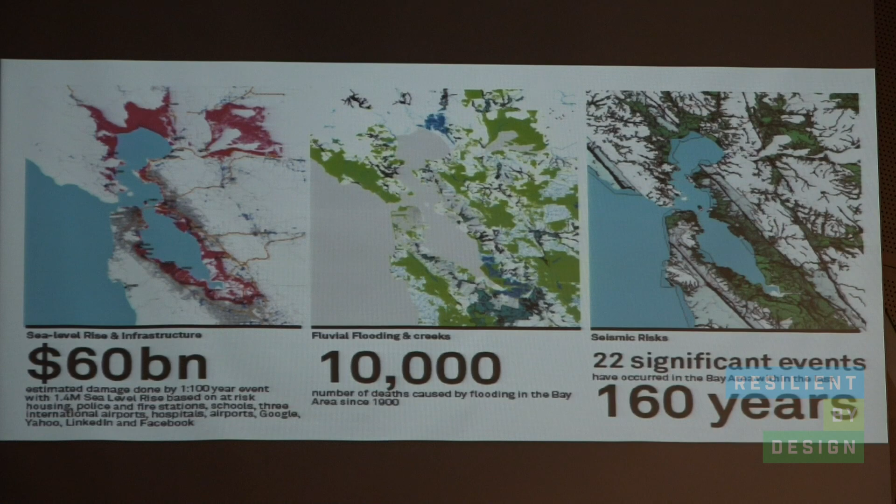And then further to that is seismic risk. There are fault lines on the ridges that are limiting retreat up the hill for those urban settlements, and there's also liquefaction risk on the shoreline.

But is it possible that the real disaster is already underway?

When we tour around the Bay Area, it's clear that a group of cities has grown into this kind of mega region, but it's something of a mega commuter region. What most people talked about as their shared experience is the time they spend in their cars on the motorways looking at the Bay, which is really sad for us from cultures that really value waterfront places, and that's something we wanted to bring to this process.

But also equity — there hasn't been an equitable sharing of that prosperity as the region's grown, and furthermore there's some limitations on the centres of community that used to be places for people to gather; they've actually kind of weakened over the years. So the street retail, the libraries, the town centres, they've kind of faded, and that's definitely a problem. Who's greatest impacted by these challenges?

Well, we went to a number of vulnerable communities on the shoreline. They're traditionally located on the shoreline because of that engagement with previous industry that's now gone. They don't have access to open space and recreation, and they don't have access to the sorts of community facilities they need to build social resilience.

There's also the ambitious Baylands projects and the Bay Trail, which are fantastic, but they're at risk from sea level rise, and also there's something missing in that equation that kind of links those communities to that space on the shoreline.

So is there a better model? It's definitely something that we've talked about a lot in this process. There's 101 cities, 9 counties. Is there a way we can turn something that we talk about as a weakness for this region into a strength? Can we use that kind of granular infrastructure of schools and libraries? Can we build on the number of communities, making a network perhaps, rather than complaining about how hard it is to organise everybody through one regional governance model?

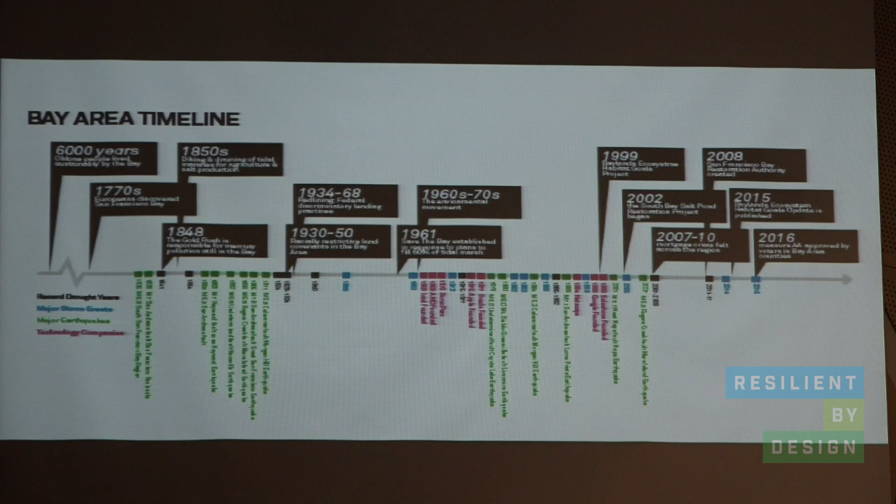So we look across the timeline of the Bay, and there's certainly been a fair few disasters in the past. And what's been the biggest asset within those disasters? Have our needs really changed that much since 1906 and just last month?

We were really interested to see how communities use spaces and systems every day, but also in disaster. Those systems are sometimes large, but they're sometimes small — sometimes movement systems, sometimes information systems, or just sustenance systems.

So when we start developing a concept for the Bay as a region, we start by looking at the existing pattern of development. The Bay Trail, the Ridge Trail, the transit, freeways and priority development zones are all in loops, and they're vulnerable — like a circuit — to being broken, as we've heard over and over again.

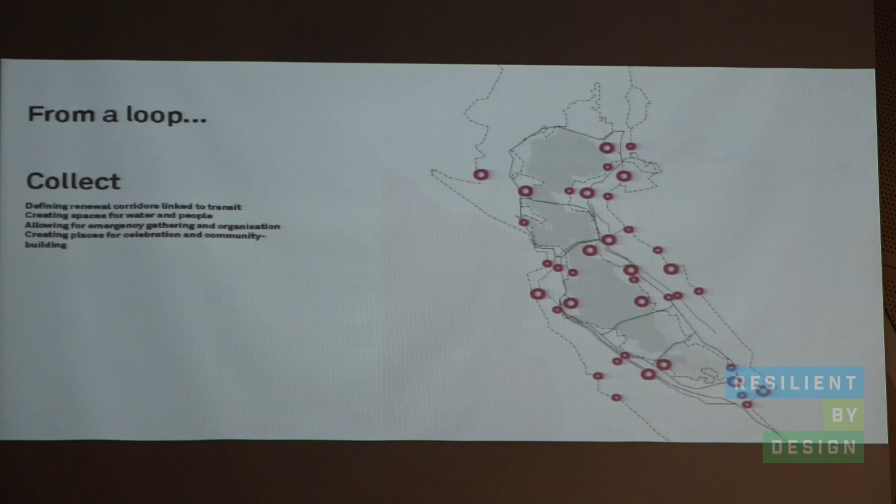So what we'd like to do is form points of collection on the waterfront for people to come together, up in the towns and at transit nodes, and up at the ridgeline. Through these points of collection, we collect water, collect people, and make them points for disaster response.

So we want to join them with corridors, connectors as we call them, giving people access to the Bay, engaging them in the conversation about how we respond to these resilience challenges, and then connecting them across to each other — transitioning from what we call a loop into a network.

And we think this is key to resilience. It's key to managing existing water challenges. It's key to managing existing community capacity for resilience. But most of all, it's building a system that is less vulnerable than the current system, which we've seen so often can fail.

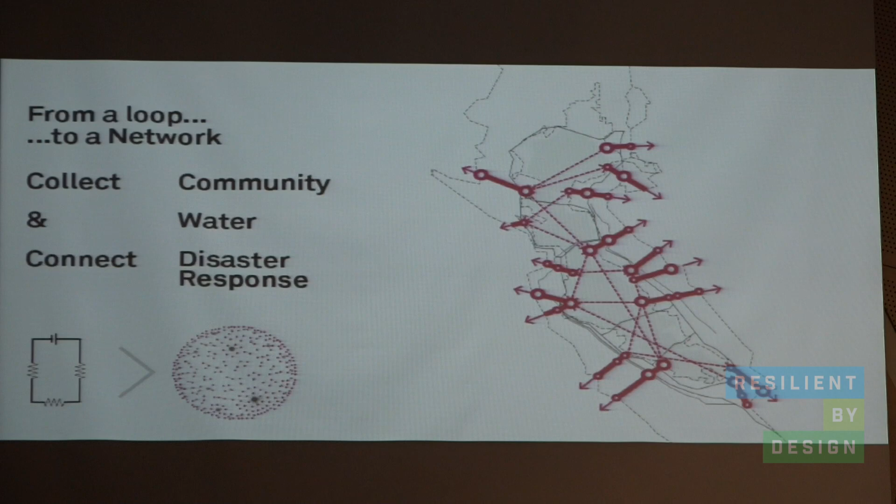So we talk about this collect and connect system — community using it, the advantages for water management, and disaster response systems. So we're looking at two scales here: a regional platform that can create that network, but also this prototype project.

And if we dive into the existing condition, these are the types of sites that we're talking about — communities of concern that are on the shoreline, but they're sharing it with infrastructure and industry, and they're very tightly packed in.

They're suffering from fluvial flooding along creek lines, but that's often made worse by restoration projects that are bringing rising tides closer to those communities. And they're also often just downhill from transit nodes and town centres that were at one time real centres of community, and just need a little bit of help to get back to those valuable systems that they could be.

So what we're interested in creating is space - making room for water, making room for communities, and making room for disaster response. We're talking about making a series of spaces up the hill in the town and down on the water's edge, connecting them to creek corridors so that they carry water capacity, retention, treatment and reuse.

Part of our approach is actually building a digital platform. We need the communities, because we believe that communities themselves can help to provide programming for these collector spaces. This is just an example. We believe that the intelligence of the community can produce the programs that we want to gather in our connectors and collector spaces.

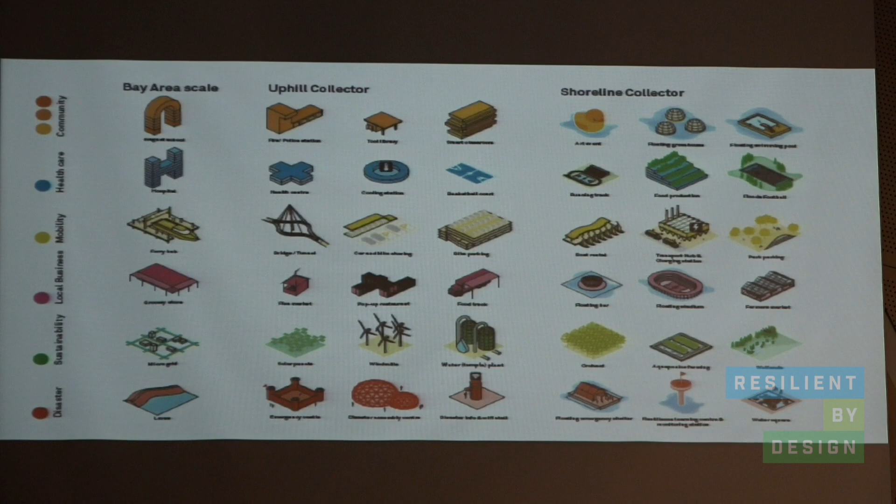It's about the communities, but it's also about infrastructure, disaster solutions, education - different levels of connection. With our platform, we will collect these ideas and programs, and then we can turn the collector areas really into urban labs. So the communities we're looking for can be the first ones and provide examples and set the tone in the development.

So we've been talking about making these collectors, and we always have an uphill and waterside version. The most important role of the collectors is making spaces where communities can meet - places where we can add programs for education, where we can upgrade transport by making better links to bikes, to bus systems, where local businesses can set up, where we can make learning centers as well.

During some parts of the year, the collectors really are collecting the water, like they might have been doing on days like today when we have a storm. There will be retention areas, both above and underground, but around the collectors there will still be places to do something with water reuse. The ferry will still be accessible even in the flooded areas.

There will be floating structures, and places where you can find excitement and healthy things like markets and playgrounds. The collectors are also an important space because the community will realize that by using the connectors, they can go uphill or downhill to spaces where solutions are in times of disaster - maybe shelters, information, an escape way when you can go down to the ferry.

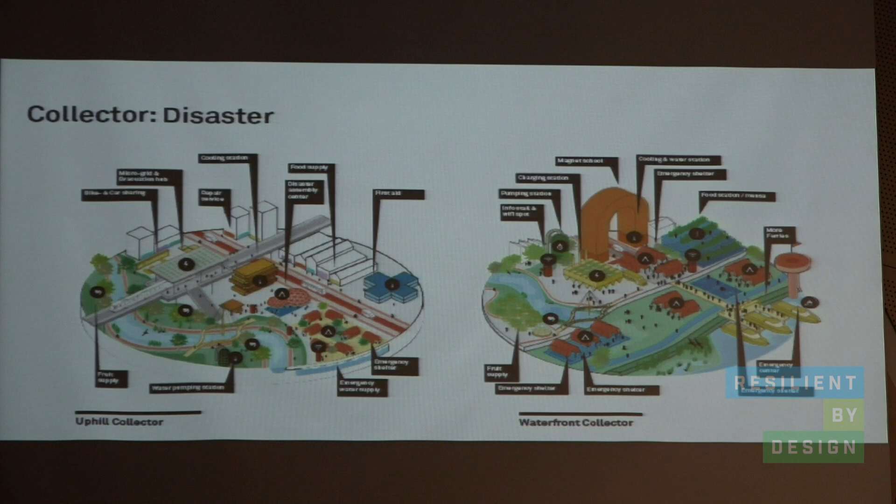Because our connections are across the Bay systems, which are always circular, when parts of the infrastructural systems break down, we actually provide ways for people to go up or downhill whenever needed, and you can also get information there. Ultimately, along the public spaces we can make, along the streets and along the water retention areas, the creeks that are renaturalized, people might also find micro-hubs of information and educational facilities, higher value public spaces, and spaces for community gathering.

And ultimately, our idea is, of course, to bring the community back to the bay.

So I'm going to talk through our 3 opportunity projects. As Natalie was saying, really, this idea, this system, this collection of elements, connections, and collection points, we think could be applied in multiple locations - around 50 or so we've identified, and of course we've focused on 3 in particular.

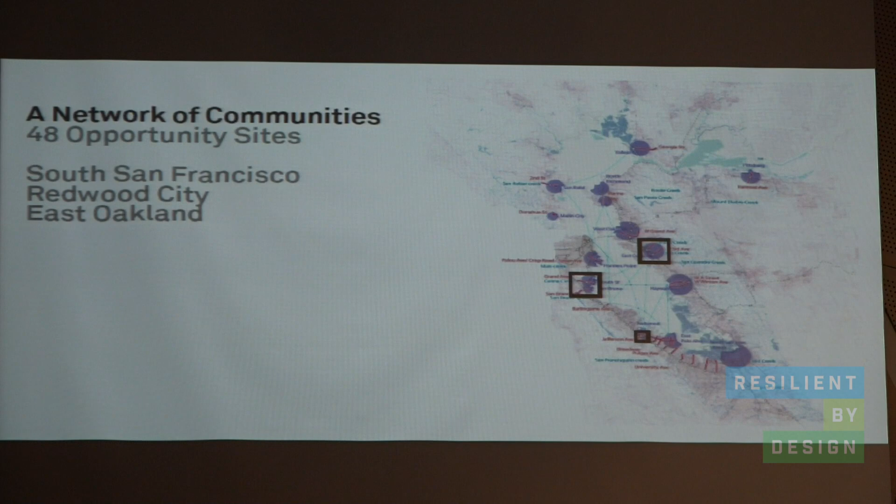So I'm going to run through why we've selected those, and I guess the starting point of our thinking, because it's so critical for us to be thinking about those individual communities and what they would like to see in the future of those places. We're just really making a few suggestions at this point that we would need to work through with those communities.

The 3 opportunity places that we've looked at are South San Francisco, Redwood City, and East Oakland. What these 3 places have in common are some of the challenges that we think are particularly important or urgent: flooding risk of the foreshore, communities of concern, and often those 2 things overlap. Infrastructure, such as motorways and rail, that block access to the bay, and in turn block the opportunity to open up the bay edge for public use.

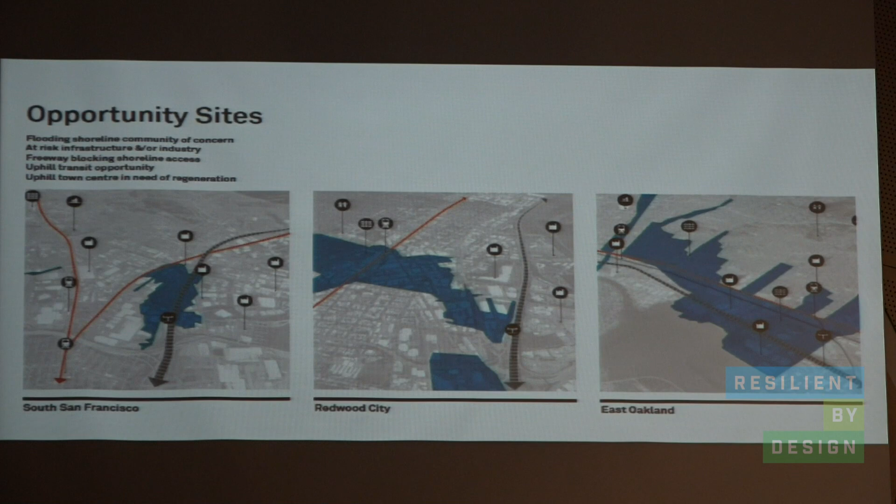Uphill transit opportunities, as well as uphill town centres and main streets, which effectively have been through a period of decline. So firstly, looking at South San Francisco, self-proclaimed as the Bay's industrial city.

The main street of Grand Avenue runs east-west through this place, westwards into the hillsides, which were once spotted with cemeteries, eastwards to the industrial waterfront, a place which has been undergoing quite interesting change, particularly more recently.

This area has major flood issues. It has a downtown and an identifiable main street, which has gone through some decline over decades, but is undergoing a revitalization program currently. But one of the key issues here is that connection to the waterfront from the main street, particularly with the impact of a few pieces of infrastructure coinciding, rail and motorway in particular.

Within our thinking, we see a future where that main street and other street connections are revitalized and reconnected to the waterfront. We've expanded space along creek lines, for ecological as well as social program. Thinking about what that program could be, we're thinking about the industrial spaces, how they could be retrofitted or augmented with community program, with more ecological ideas for water treatment and water collection.

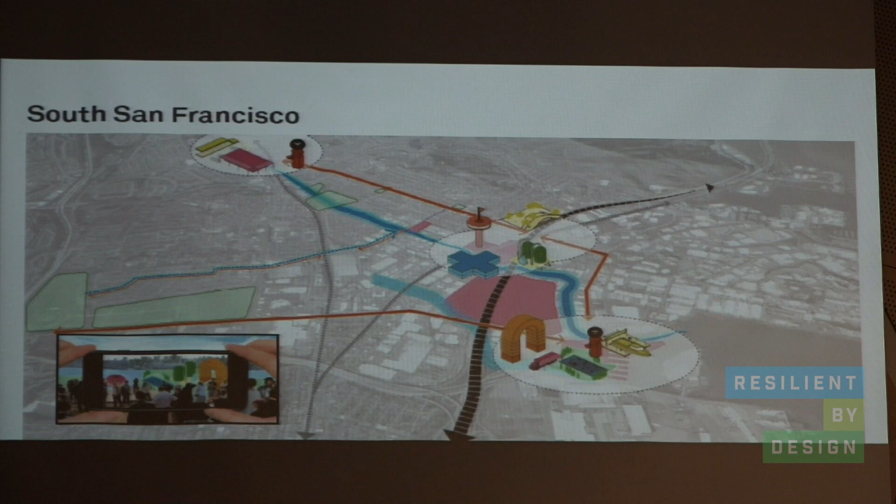A resilience learning centre, a focus around education spaces, whether that's formal schools or informal learning spaces. And then thinking about the future of Grand Avenue, the potential for local enterprise, local artists to start filling empty shop fronts, to start occupying blank facades, to embed digital as well as ecological infrastructure within the streetscape itself, and potentially to bring transit back to that important local connector for that community.

And then looking at Colma Creek, where it hits the foreshore, creating a large open space which can be flooded regularly if that's what happens, but then also creating new pedestrian and cycle connectivity, new spaces for learning, whether it's a magnet school or informal outdoor classrooms really based on the ecology and the water functioning of that place.

Secondly, Redwood City, claimed to be the oldest city on the peninsula, established, as you can tell by the name, for the forest industry, at that point between the waterfront and all the trees on the hillside. So a critical point in that kind of transfer of the resources onto the water.

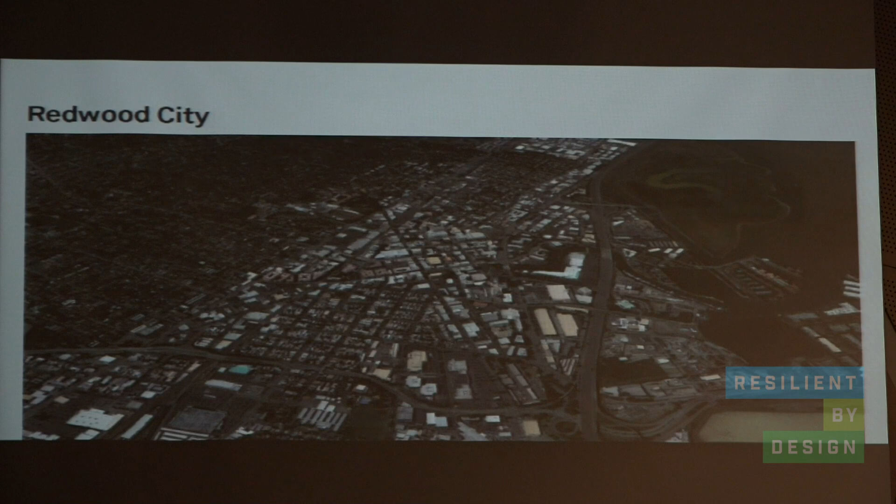Again, a place that's highly vulnerable in terms of flooding, a revitalizing downtown area which is disconnected from waterfront because of infrastructure and industry as well.

We would look to build on historic streets, in particular Broadway, which links to the bay itself, being able to unlock greater public space at the bay edge, but also linking into the hillsides, to deliver people to that natural amenity, but also as disaster response.

What we've indicated here, as well as in the other locations, is the idea of sending and receiving areas. The sending area around the downtown, which could be regenerated in some way, creates finance, which is then invested in the receiving areas, creating new public amenity, new public space and infrastructure.

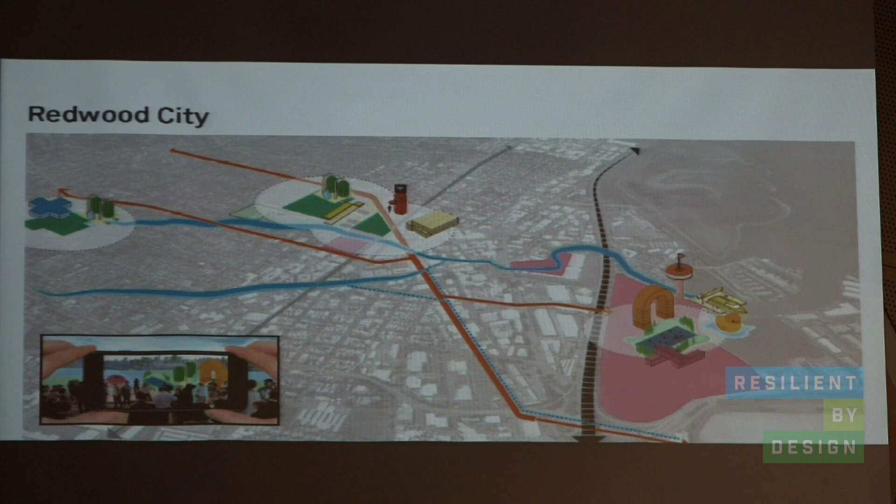In terms of some of the program, again, the idea of water, perhaps in this location because of the interesting water temple idea on the hillside, perhaps there's a modern day interpretation of the water temple, perhaps a collection of cultural and artistic spaces, which is more relevant to this area. But then also the idea of the waterfront being inhabited by family groups and community groups as well.

In the town centre, we're thinking a new station plaza, one that's embedded again with technological and ecological systems, a shoreline park, which extends that water edge connectivity for cyclists and walkers, fields that can flood but can also be used for community sporting events, for picnics, for food-based festivals and other events. Again, bringing people to the waterfront and helping them to engage not only with the water but with each other.

And then thirdly, East Oakland, a place that's undergone huge change, particularly social change over the last century. Once had a system of creek lines that have now been altered, somewhat destroyed by infrastructure and industry as well.

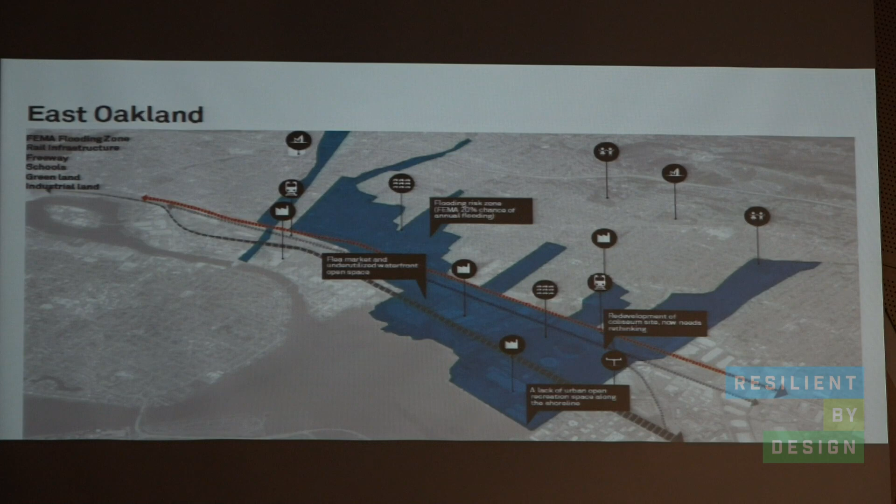Again, similar challenges to the other two locations: significant flooding areas, connectivity problems, a lack of open space along the water edge in particular, but also in the upper areas of the hillsides. So we see an opportunity for a number of urban connectors from the communities to the waterfront, the opportunity to open up significant areas of open space around that waterfront and to continue some of the connectivity systems occurring on the eastern side of the bay, such as the Bay Trail.

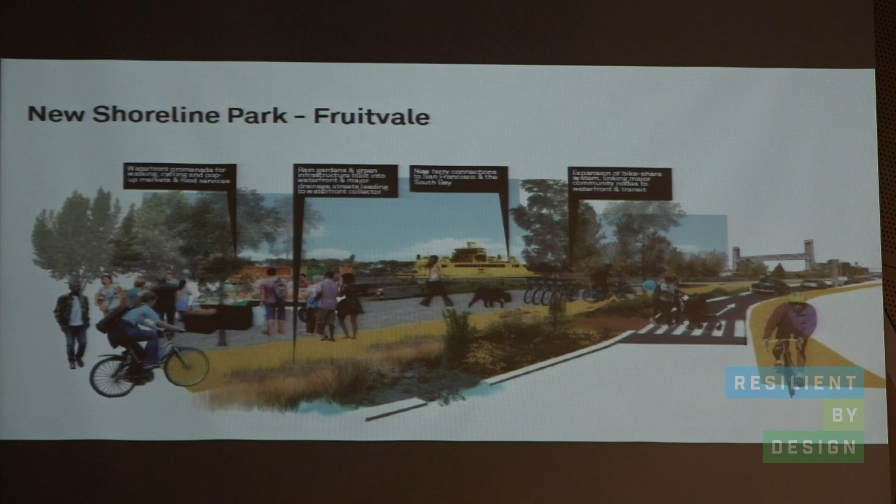The programs here are very much focused on community need and to be co-designed with the community themselves. We think there are great opportunities around food production as well as distribution, possibly harking back to the cultural history of this place as the fruit orchards and fields of the area. So spaces along the waterfront where community engagement and greater connectivity for cycling, walking, potentially a new ferry connection linking to the rest of the bay, but then along creek lines as well, with food-based, community-based activities and events which could occur.

So we thought we would wrap up by talking about this idea that these places can start small. They can be informal, community-led, community-focused. We're really interested in creating proactive and optimistic engagement with people to start with temporary, small scale, and then build to the larger regional scale, thinking about many of these projects as experimental, innovative, new models of not only creating things, but working with people and different organizations. And looking not only to communities and government, but to a whole range of other stakeholders and participants in the process, particularly thinking about where funding sources may be through FEMA, through Caltrans, through water infrastructure and disaster relief funding, which could be unlocked and redirected towards more of a community outcome.

So ultimately building that idea of this network of communities that are brought together by this idea of connecting and collecting people. Thank you.

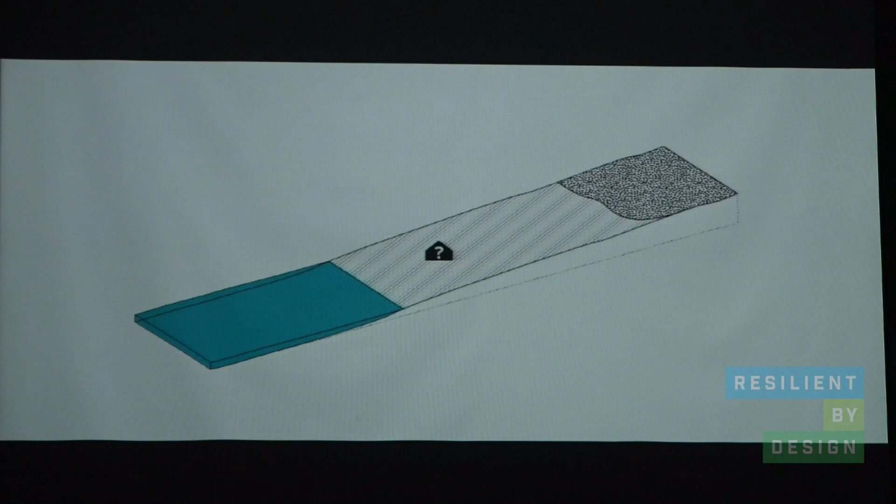The Bay Area is in crisis. When large groups of our neighbors can't afford to live in their homes, then the model for living in the Bay is broken for all of us. Many of our most vulnerable communities, those enduring poverty and structural racism, also live in areas highly susceptible to sea level rise and flooding. We need solutions that allow neighborhoods to remain in place and thrive. We must produce more housing, preserve low-income housing, and protect residents from displacement, while improving the quality of neighborhoods for everyone.

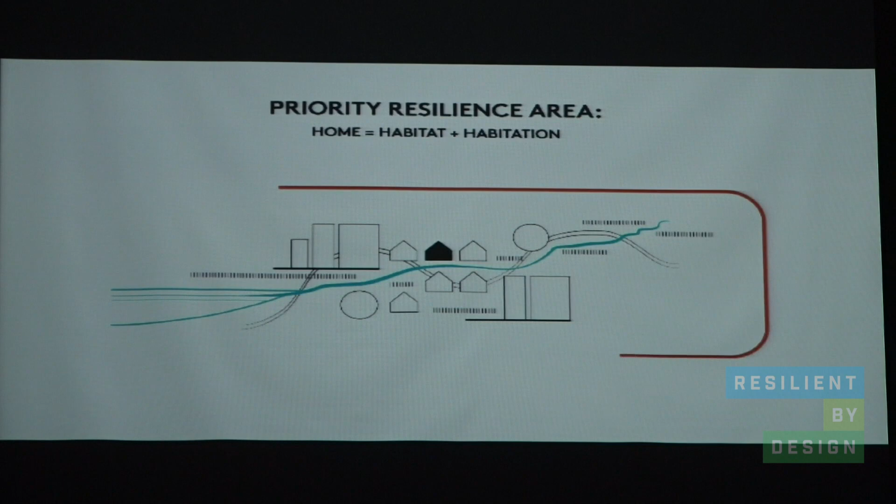The Home Team proposes the creation of priority resilience areas where new ideas of home emerge from a healthy and dynamic Bay ecosystem. New regional patterns along the Bay Edge intertwine the health of the Bay and the health of our neighbors. Working in partnership with community members, we will use design as research to take on challenges and create opportunities for communities to relate, adapt, and thrive.

North Richmond is a place of historic racial inequity. African Americans who arrived in the Bay for the World War II shipbuilding effort were forced to settle in the low-lying area, cut off from other communities by railroads and infrastructure. The community organized, developing a North Richmond vision plan, programs at the Verde School, and greening projects with Urban Tilth.

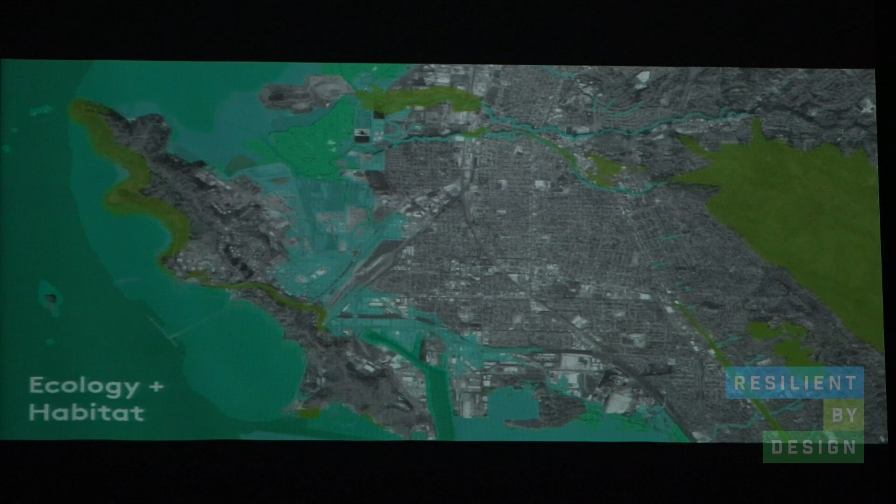Green infrastructure and floating trails can address flooding while enhancing quality of life. By improving walkability and bikeability to BART and the ferry terminal, residents can reduce commute times to re-engage with Bay nature at Point Molate as part of a daily routine. Horizontal levees and improvements to wastewater infrastructure open up opportunities to build new, permanently affordable housing.

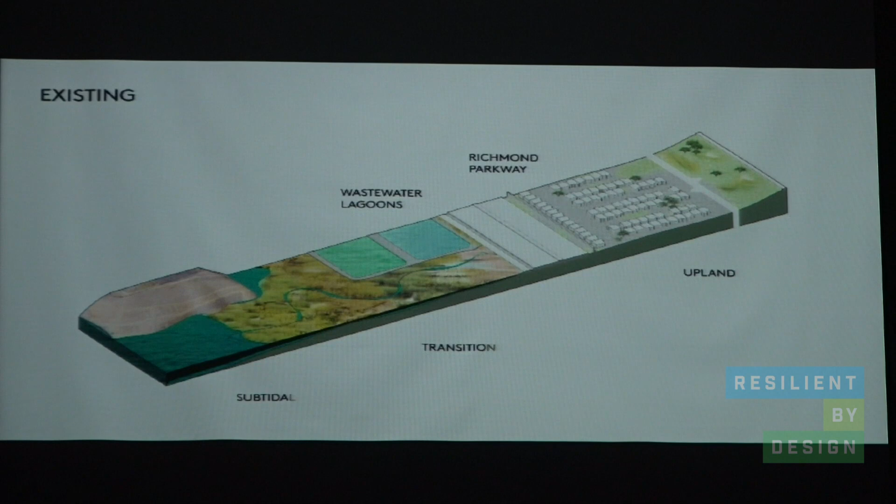The community and ecosystem will thrive, catalyzed by an urban ecology business incubator that is a source of jobs, innovative housing, and a clean energy park on the site of the former landfill. In the near term, the North Richmond Water Reclamation Plant can provide treatment with constructed wetlands, allowing for pocket marsh connections that are healthier for the Bay Edge. As waters rise, the constructed wetlands transition to salt marshes to augment the Bay's estuarine habitat.

Looking 20 years out, decentralized wastewater systems can be located in each neighborhood. These wastewater systems look like greenhouses open to the public. They can also process increased nutrients and return clean water to the Bay. As infrastructure is relocated to inland conditions, the waterfront is freed up for new floating housing and ecological restoration.

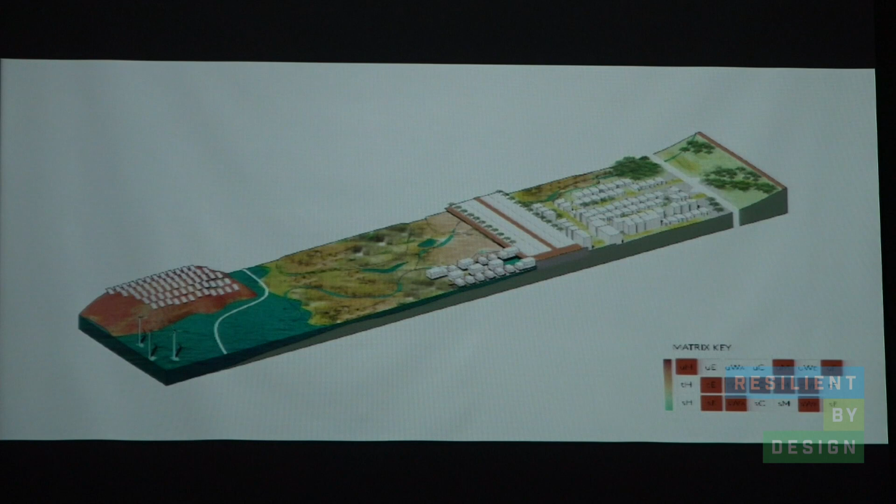Students from Kennedy High School in Richmond have shared visions of healthy food, floating homes, rooftop gardens, and multimodal transport. Stacking funding sources for ecology, wastewater, and health can support this neighborhood transformation, a priority resilience area in North Richmond.

Marin City residents are well organized and tight-knit, yet constant flooding and deep health disparity highlight inequity within one of the nation's most affluent counties.

Improvements to Highway 101 can mitigate its regular flooding and catalyze positive change in Marin City. However, it is essential that the existing residents not be displaced. People here have experience with things not working out in their favor. New economic models need to come first for producing, protecting, and preserving housing.

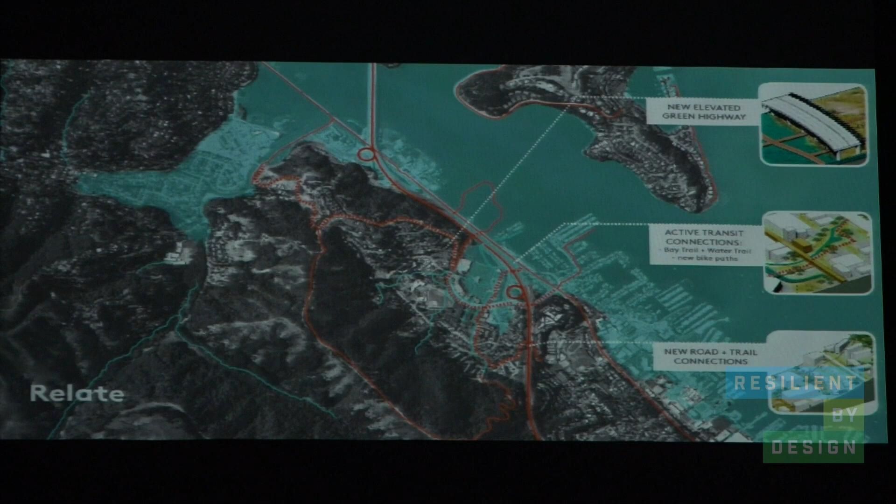We propose elevating the low-lying portion of Highway 101 to provide a critical second access point to Marin City. A new horizontal levee and marsh areas will adapt to rising water while supporting new affordable houseboat cooperatives. Proposed creek restoration and street retrofits with green infrastructure will help reduce upland flooding.

The community thrives as new housing and jobs come to Marin City, and a community reinvestment fund directs revenue to support projects with community benefit, such as an enhanced community center and a community-owned clean energy microgrid.

In the short term, the highway median can be redesigned for flood control and provide an immediate response. A raised bay trail can be designed to be part of a new horizontal levee that phases into tidal marsh as sea level rises.

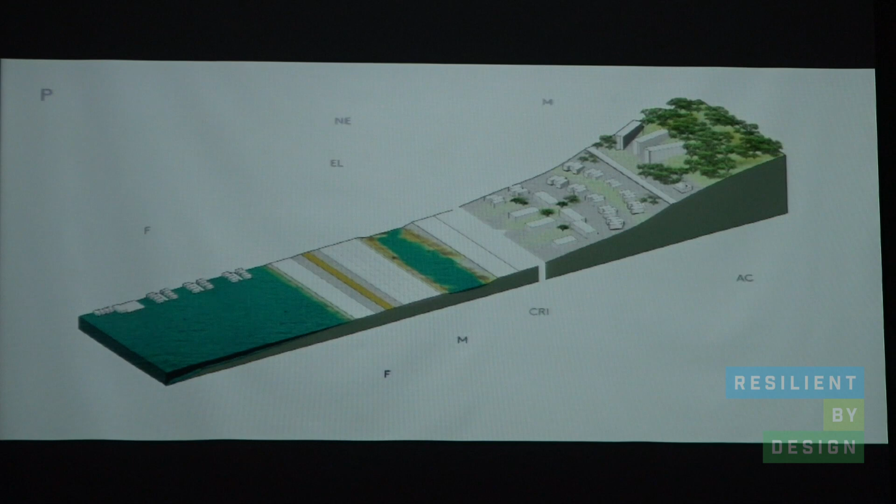In 20 years, an elevated Highway 101 and a reconfigured shoreline support development of a new mixed-use center, providing jobs, healthy food, and permanently supported affordable housing along a living shoreline, with houseboats and a new expanded tidal marsh.

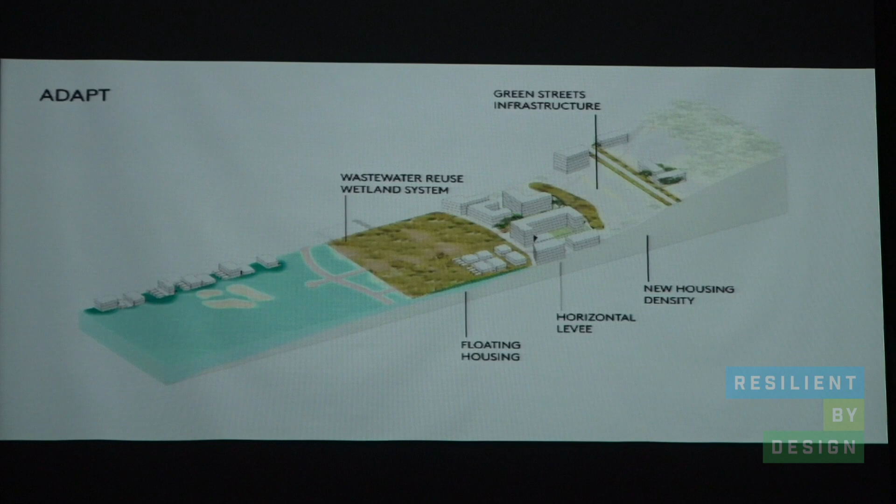Residents, hikers, bikers, and tourists use new trails and floating bridges to move easily between Sausalito, Tam Valley, and Marin City.

Resilience investments are a catalyst that can include many co-benefits, such as space for a flea market every Saturday in a new floating town square in this priority resilience area in Marin City.

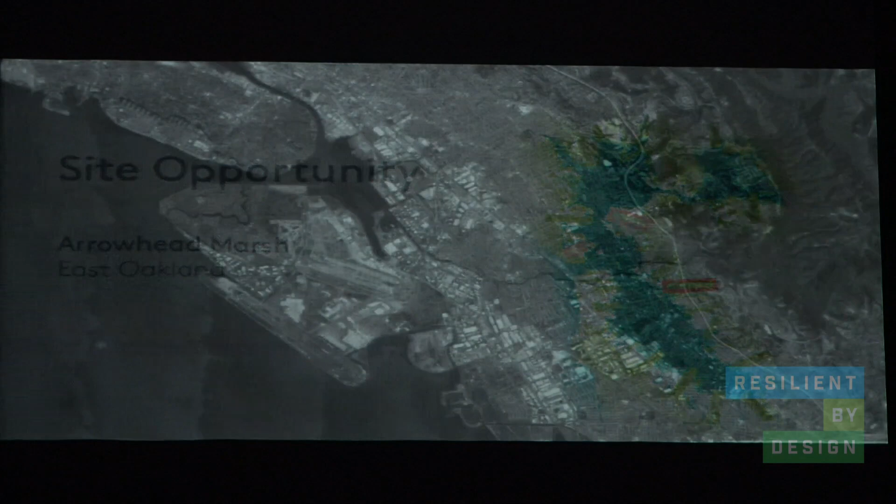The neighborhoods in East Oakland have motivated community organizers with adopted master plans for San Leandro Creek and Arroyo Viejo and a strong citywide resilience plan.

But the challenges of racial inequity are clear. Between 2003 and 2013, a young black man in Oakland was as likely to be killed in gun violence as he was to be prepped for college. Our team is committed to a process that recognizes the urgency in that disparity.

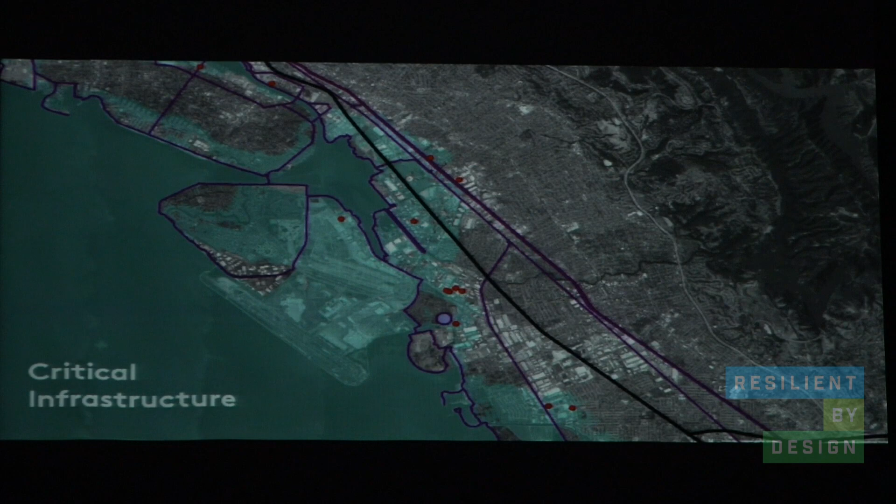Adaptation can occur as the Bay Edge is restored, with transfer of development rights and community land trusts supporting development of permanently affordable housing for a mix of incomes, including the missing middle, in mixed-use neighborhoods that include local jobs and access to healthy food.

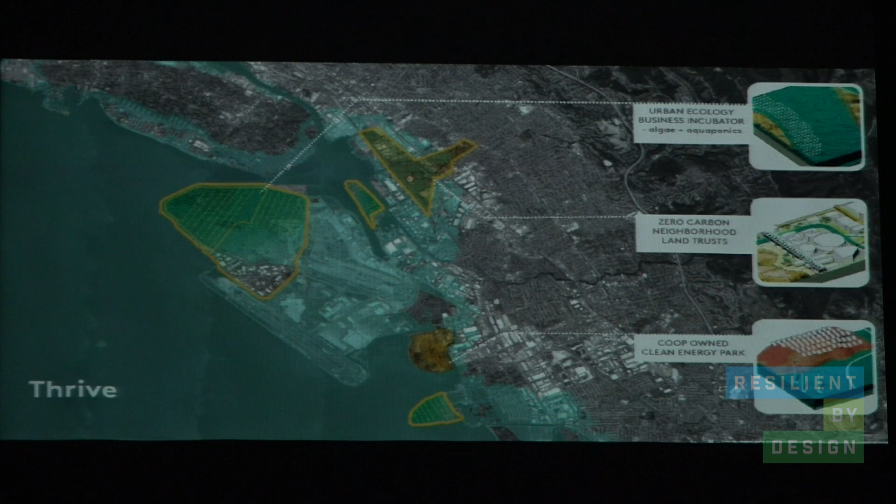A community-based clean energy microgrid, a decentralized wastewater system, and transit accessibility could contribute to more inclusive neighborhoods with shared wealth building. A 20-year vision includes a horizontal levee along the 880 freeway, protecting that essential transportation asset while creating a valuable site for mixed-use, mixed-income housing that supports estuarine life with muted marshes behind the levee.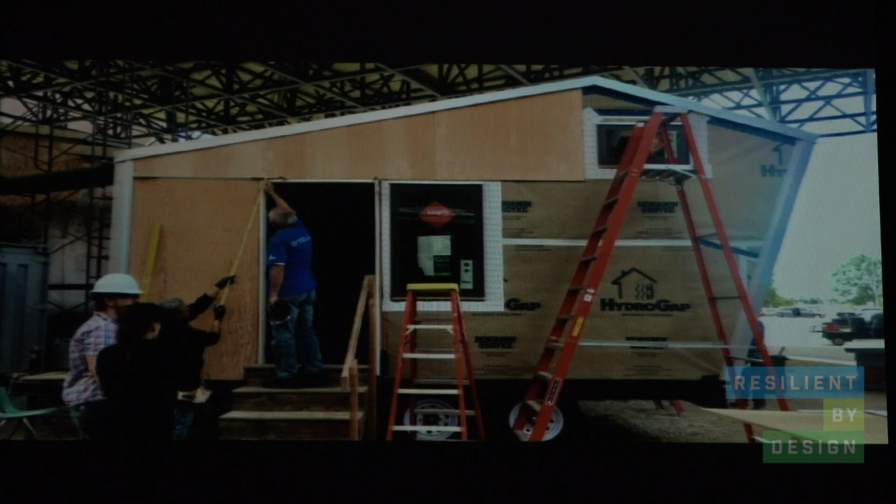No one is better at defining and mapping assets and liabilities than community members themselves. The Streetwise app will be an important tool for residents to highlight strengths and barriers from their perspective. Our work with the community will also include prototyping, the piloting of community-driven ideas initiated at relatively low cost, developed in partnership with educational institutions, and can jumpstart the transformations.

We look forward to working with the neighbors to hear the stories, understand the hopes, and collaborate on design that strengthens the foundations of home.

So through this collaborative research process, it's been so rich over the last several months. Our team has gained such a deeper understanding of the broad scale and the multifaceted capacity to the challenges ahead of us, and really put the work we do in urban design and sustainability in a much deeper and more grounded context. And like so many of the other teams, we engaged in a very involved mapping process, which revealed a series of critical hotspots as we saw them.

Shown here on this map is an outline of some of the potential of these priority resilience areas. We see the need for interdependent and bioregional based solutions that address these regional connections, but ultimately happen at a local scale. And the question we ask continually is, what is that scale, and what's the sweet spot between the local neighborhood and the region?

And we feel it is this creek shed. So shown on the map there are probably 18 to 20 or so sites where there's high potential for replicability among these new, what we're calling the priority resilience areas.

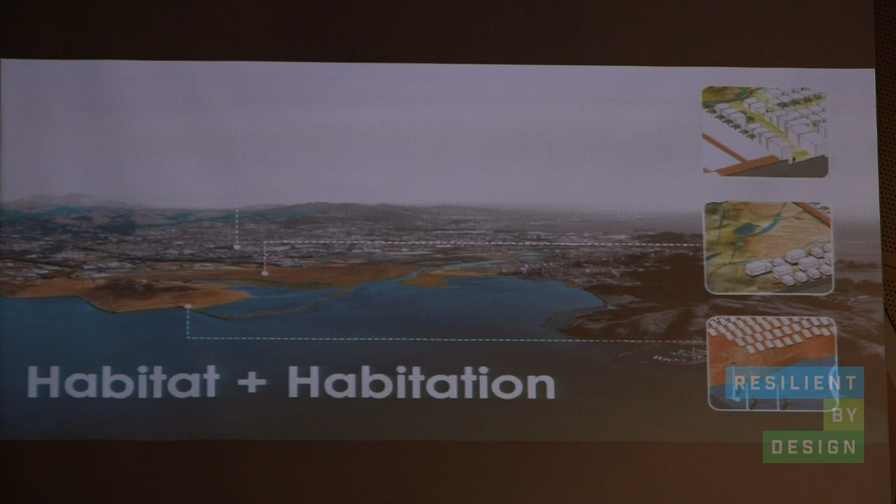The habitat and habitation matrix that we developed really as a generative tool became so much more, and home is the true synthesis of these two. It's the blending of creation of habitat for other species alongside our own human habitation needs. We're excited to get into the details, thinking of floating housing pier structures which double as reef and biomimicry habitat for critical indicator species in those particular ecosystem districts.

Ultimately, the process is going to be long and hard, and it has to include capacity building among agency and stakeholders and the community itself that we're working with. We're talking about 3 years, 20 years, and 100 years. So we know the process is as important as the outcome going forward.

With that, we're really optimistic. We see so much wealth of ideas and opportunities and stacking of co-benefits going forward. Thank you to all the stakeholders through this process who have brought so much to the table. We're truly standing on the shoulders of giants to move this forward. We look forward to it. Thank you.

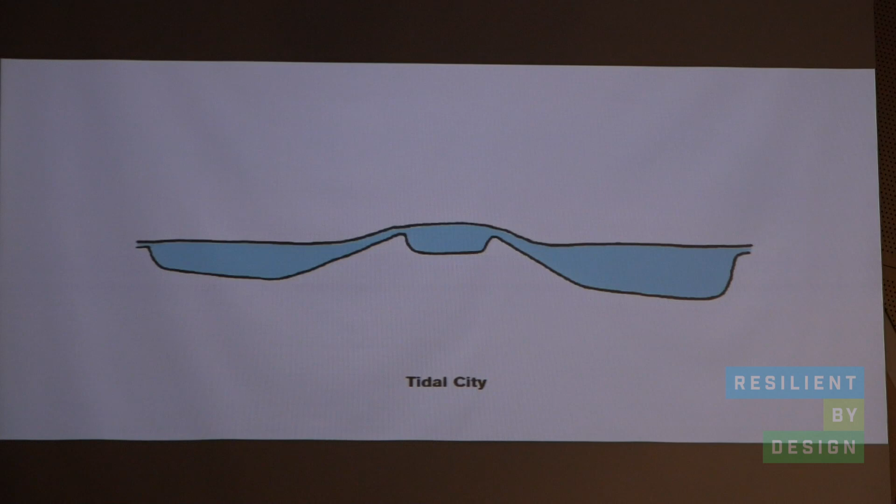So how do you live in the edge? What we're saying is that in a time of sea level rising, groundwater flood rising, we need to expand the edge of the bay to include both habitat and housing for ecology and people living side by side. And we've asked ourselves how we can rethink the bay edge as a place where people and nature can coexist.

And then the second big idea is that in the 20th century in particular, we built these corridors to get us as fast as possible from point A to point B, and it ripped apart communities. And what we want to do is really rethink that, because right now we have a huge challenge: all of those corridors have to be elevated and protected from flooding and seismic activities, and also modernized to accommodate new technologies.

So this is our once-in-a-lifetime opportunity to really rethink those as a generator of jobs and housing, as a way to pull those communities together. So we call that big idea resilient corridors. The first idea was tidal cities, the second one is resilient corridors.

And then thirdly, it's an issue of—we've heard a lot about this from different groups today—but our take on it is that it's a governance issue. These natural and man-made crises don't respect the fact that we call one area a town and the other one a city, or these municipal boundaries. So we and our policies do.

So we need to think about new alliances among existing agencies and new partnerships between community advocates and the residents and the stakeholders so that we can leapfrog these jurisdictional boundaries. And we call this idea resilient equity hubs.

Now, all three of these are big, important ideas independently, but we really believe that the real magic happens when we overlay them, and that's when we can transform our relationship to the Bay Edge and create some new, amazing ways to stay and live in that edge rather than retreat or wall ourselves off from it.

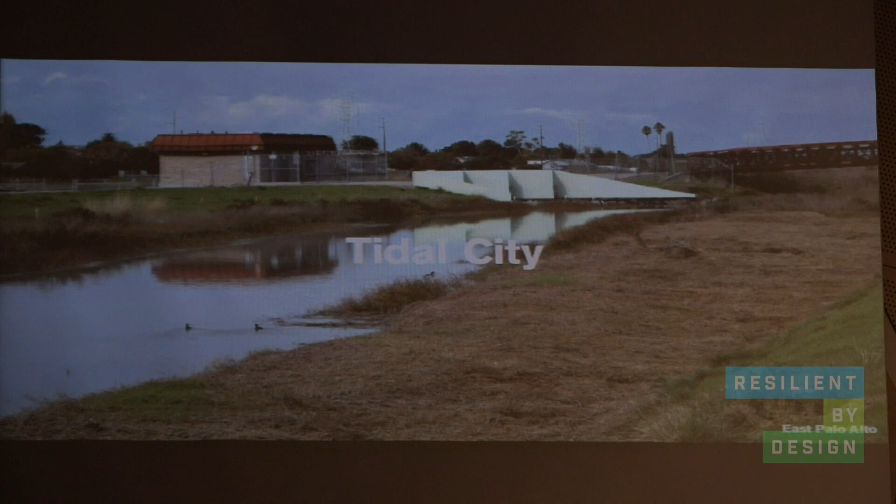We don't have a network of pumps that manage that for us. This is the exception, not the rule. So we're not ready for a higher water table, and we need to think about what that means. So the research my group was doing at UC Berkeley was to map where there is a shallow water table in the Bay Area.

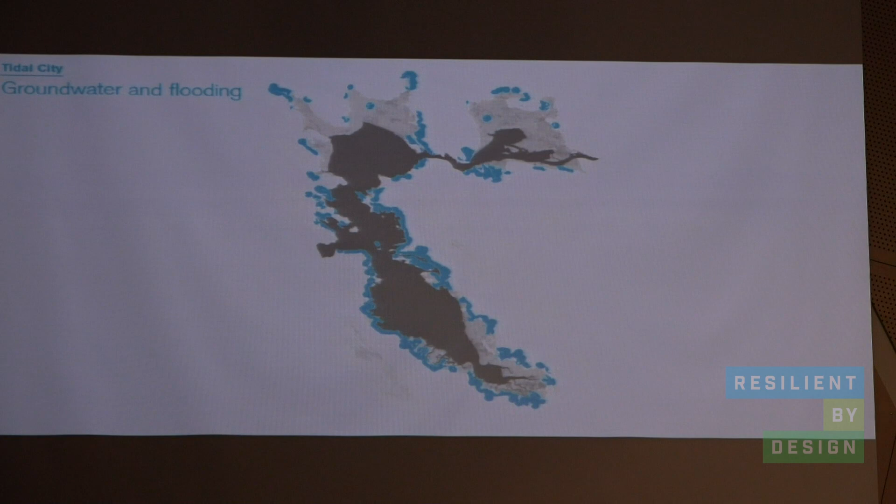This blue area on this map shows where the water table is within 6 feet of the surface, and that means that everywhere the sea level rises 6 feet, all those blue areas would be emergent groundwater. That's a very serious problem—it would fill our pipes underground, expose buildings to mold, could heave foundations. This is a very big deal in a region that hasn't had to manage this in the past. And it also increases our liquefaction risks, so in a seismic region, it's even more important that we understand how to deal with high water table zones.

So we looked for examples. We looked at Amsterdam, we saw floating architecture. We thought, okay, this is something that we could potentially use here in an innovative and different way, but using some of the same proven technologies.

And the problem is, as I'm going to show in these couple of sections, that as the sea level rises—that dark blue is salt water and the light blue is fresh water—we're going to see that light blue freshwater rise and eventually emerge on the land, even if we build levees and walls.

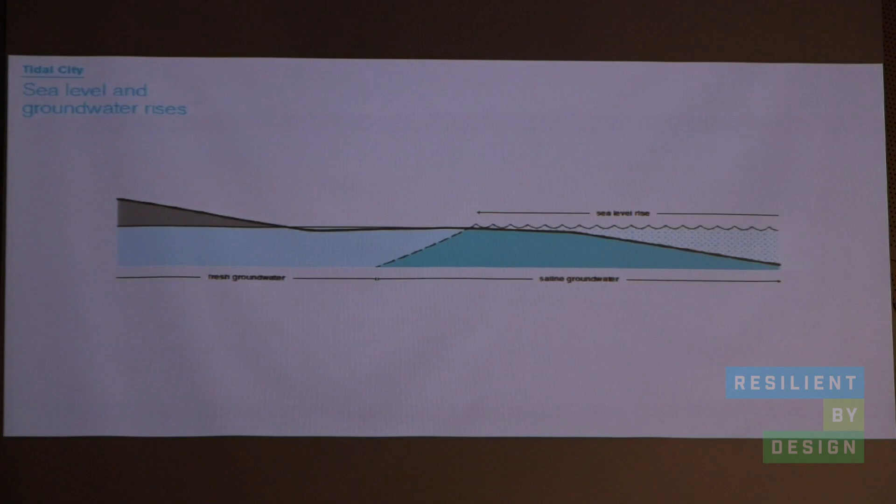One of the oldest ideas in landscape architecture is to dig a hole and make a mound. If we do that, we can balance our cut and fill locally and use the reshaping of the land as the primary strategy for how we continue to occupy these wet zones.

We can build a wider living edge and at the same time use back bay lagoons, ponds, as a way to manage water flowing off the land, manage stormwater, manage creek flooding, and improve water quality before it hits the bay.

And create value, because it's hard to see here, but we would actually propose putting floating housing, stacked prefabricated units, shared decking, Dutch style, in these back bay lagoons to create and maintain value, because conventional architecture will fail and that'll cause displacement. So we have to find a way to continue to occupy these places to adapt in place.

And we can roll back with this strategy. We can use a new hole and a new mound to fill the old pond and move back to higher ground if sea level rise goes beyond 6 feet. So we're trying to use a new problem to come up with a new solution.

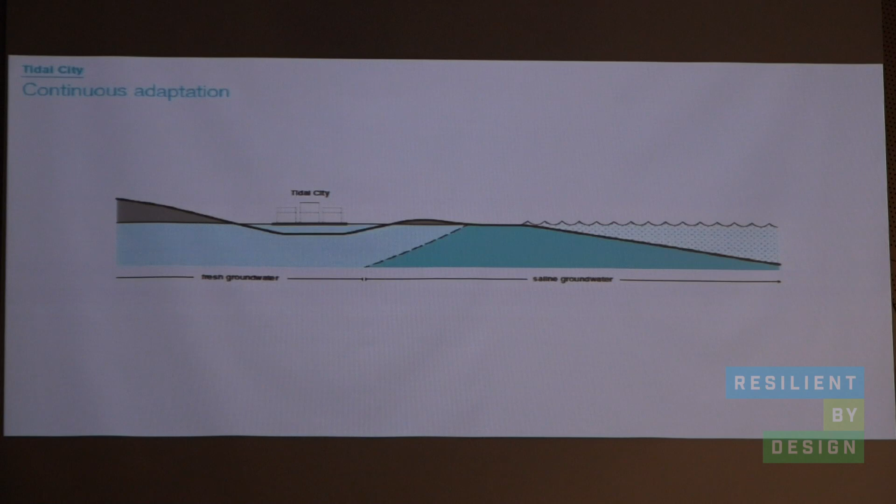That illustration here in the bird's eye view shows how a tributary might come through this band of tidal cities. We call it tidal cities because they're actually meant to hold the high tide with a series of gates and mute the tidal fluctuation.

So you don't have to go up and down 6 feet every day, twice a day, but you can actually put floating structures on something that might fluctuate maybe 2 feet.

We think that these strategies for managing water will actually create vibrant urban districts, someplace where not only can I live in one of those units, but I'm also doing a favor for the people around me because I'm holding their stormwater. I'm living in infrastructure that protects my neighborhood, and we think that's a good deal.

So with that, I'll hand it over to Chris, who's going to talk about how we would connect ourselves within this wetter shore zone.

Tidal cities is an exciting vision for how we can truly live in the edge. Resilient corridors is really about how we link the edge. It's about how we create connectivity and stay connected in an uncertain future, but also, and more importantly, how we create win-win solutions in a time of certain change.

We all know that our existing transportation systems are already stressed and at capacity. That's obvious. Even without these new stressors, we have to do something.

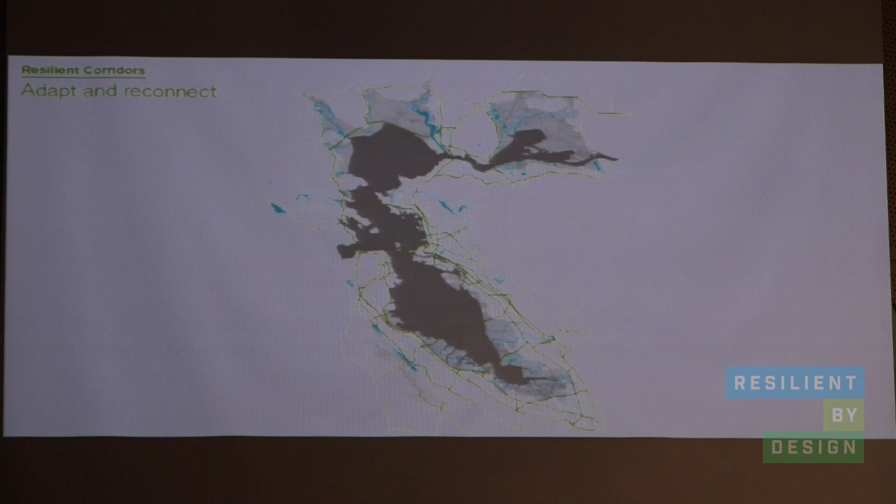In this simplified map, we've illustrated the level of impact of 6 feet of sea level rise on the transportation corridors that ring the bay and how they disconnect the various tributaries that flow from the highlands. Based on our analysis, we've identified that there's around 80 miles of highway that will be impacted at this stage, not to mention rail corridors and tributary streets that provide access to the highways.

As we look forward and envision a more resilient Bay Area, we do have this incredible opportunity, if not an imperative, to rethink and adapt these corridors, to anticipate new transportation technologies and modes of transportation, to create and build new multi-purpose infrastructures that address sea level rise, seismic, and flood risk together, and importantly, reconnect our riparian corridors for greater social and ecological movement.

So what if we expanded our tributary corridors, elevated freeways, and constructed highway mobility corridors, and built them in a new and more resilient way to allow for greater movement of flora, fauna, people, and water?

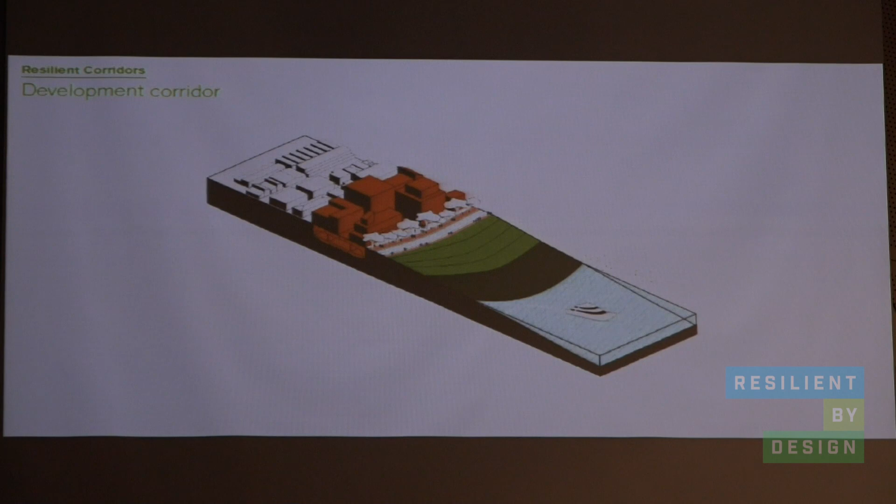Put the corridors in tunnels in select locations to create the back edge of a horizontal levee and protect inland communities. Or utilize the air rights of the corridors in select locations for transit-oriented development that can connect communities and in turn provide new points of access to communities that currently don't have it.

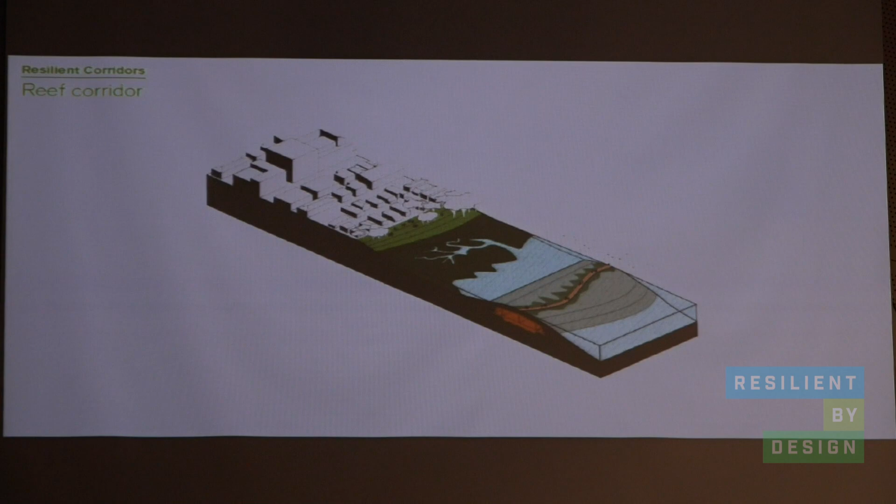Raise the corridors in select locations where we need to address sea level rise, but also take advantage of those situations to create bayside habitat. And lastly, and I think really importantly, create new corridors that fringe and connect across the bay while setting the stage for restored wetlands and wetland migration.

So the challenge, of course, and it's a complex one, is how do we stitch all of these ideas together while maintaining existing connectivity? We know that these corridors are incredible assets, and the question is how we work within them to rethink them. This is a particularly compelling example of how we might do that on the 880 corridor around the Oakland Coliseum. Taking a closer look at that, what it might be like at the intersection of an expanded riparian corridor, a new transportation corridor, and shore zone improvements.

So what all of these really point to is this nexus between regional resilience and local opportunity and communities. And it also points out this clear fact that in order for us to be successful, we need to find new ways to share and collaborate across disciplines, across jurisdictions, and within our communities.

Great. So our third idea is called Resilient Equity Hubs and focuses on governance and social equity. This map is hard to read precisely because it shows the tangle of jurisdictions, political jurisdictions that we have overlaid with watersheds. Maps like these remind us that natural hazards don't follow political boundaries, and yet because we make plans and budgets within these structures, we often lack capacity to address the scale and complexity of climate risk.

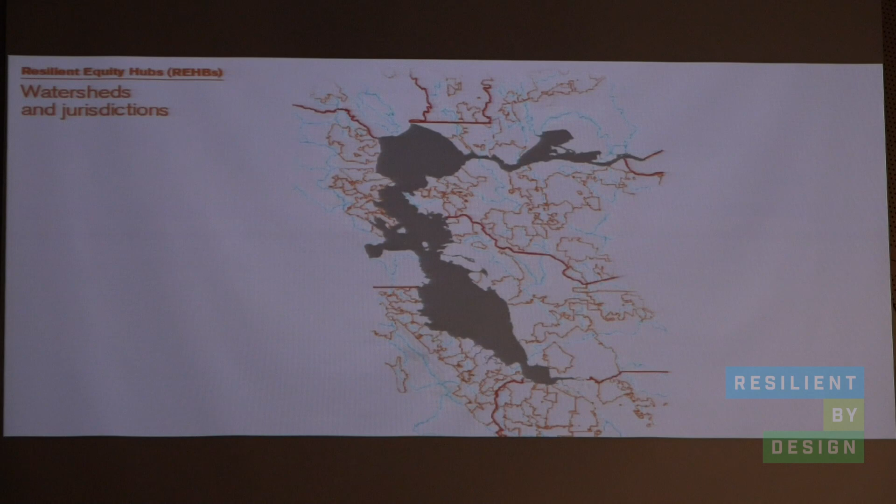The issue here isn't any lack of public institutions. We have 9 counties, 101 cities, and scores of PDAs and PCAs. Nor is our only challenge a lack of will or resources. Though the cost of adaptation is daunting, we also have an extraordinary opportunity to harness the economic wealth of the Bay Area, the mandate created by Measure AA, and really the resourcefulness of local communities. So instead, we believe that one of our biggest challenges is a shortage of viable mechanisms for coordination.

So in response, we created a toolkit of governance and financial mechanisms that can connect to design strategies at multiple scales. For example, this could include the Geological Hazard Abatement District or a transfer of development rights to fund public infrastructure in a way that could relate to local crowdfunding campaigns, at the scale of the neighborhood.

REHBs could also create an incremental change as a process stewarded by local partners. So phase 1, for example, could identify where a high groundwater table overlaps with vacant or government-owned sites. Phase 2 could build the tidal city approach that Christina just described.

Bringing in higher density, affordable housing within these sites. And then phase 3 would really start to work across property lines, forming cooperative ownership models such as co-housing or community land trusts. And spatially, this can create a kind of adjacency across diverse landscapes, using ponds in one location to alleviate groundwater pressure in others, or storing water from a kind of network of green streets.

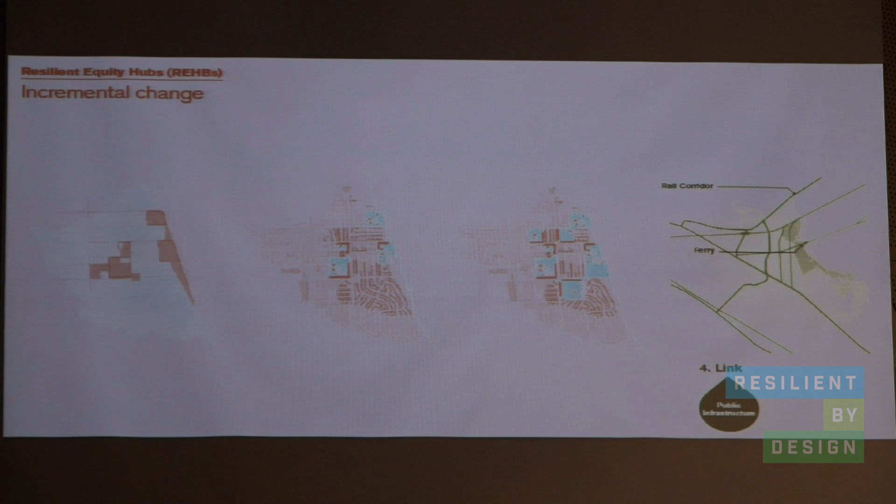And then phase 4 could really scale this up and realize the resilient corridor ideas that Chris just described. At the scale of a few city blocks, we could see this through the way that district heating or gray water recycling could connect new and old houses. Cooperative ownership could provide intergenerational care that can allow a single parent to go to work, as well as things like barbecues and tool libraries that could build social resilience among neighbors.

All right, so the 3 ideas we've just presented complement each other. Through tidal cities, we live with water. Through resilient corridors, we stay connected. And through REHBs, we make change possible for all of us.

We've identified sites where there's a strong overlap between groundwater risk, transit vulnerability, and under-resourced communities. And this led us to San Rafael Bay, San Leandro Bay at the Oakland Coliseum, and East Palo Alto Baylands. Each of these places brings together a complex mosaic of cultural and ecological vitality, and we're really excited about the possibility of creating a new kind of resilience hub with these communities.

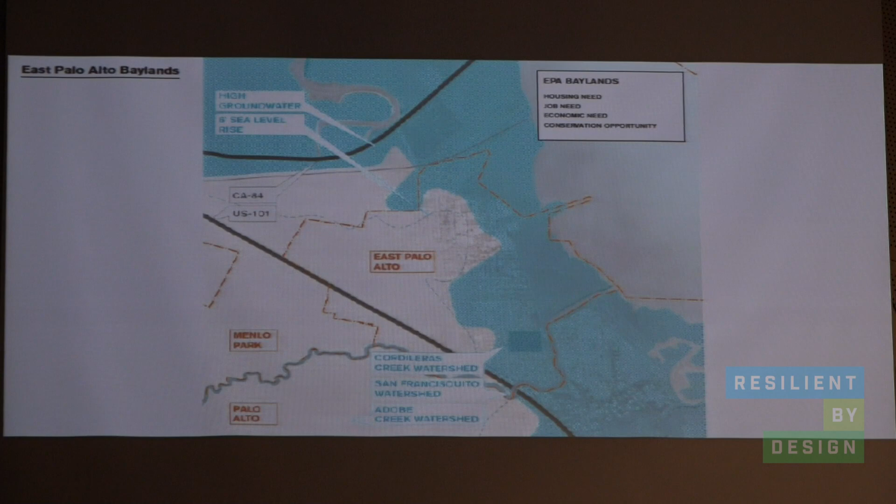So let's start with East Palo Alto Baylands, where sea level rise affects the very fabric of one of the last affordable cities in Silicon Valley. Though EPA is protected by levees and a healthy tidal water wetland, it's also vulnerable to flooding, which you can see in the dotted line, and groundwater inundation, which you can see in the blue dots.

San Rafael residents too face significant challenges and opportunities and are really uniquely perched on an edge. San Rafael's downtown is built on tidal marshes and is vulnerable to flooding, groundwater inundation, and liquefaction.

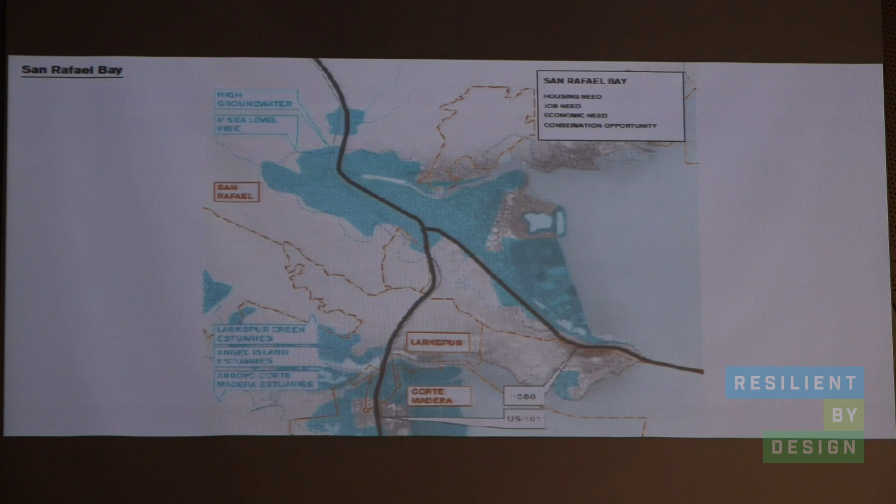So in response, we've identified places in which a much more adaptive approach can protect from both rising tides and rising rents, and basically connect back into habitats, job centers, and neighborhoods.

Our approach was to look for interdependencies across the San Leandro Bay area in a way that can connect tributaries fully to the bay, use the Oakland Coliseum site as a pilot for this high-density tidal development, and start to link these neighborhoods. By drawing resources into communities, we can build on community advocacy that's happening today with a long-term vision for the future. Stephen will wrap up with that in mind.

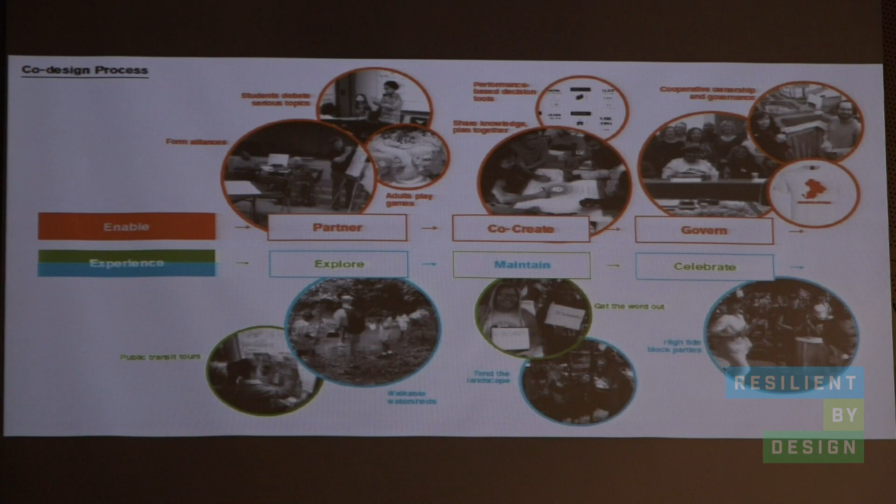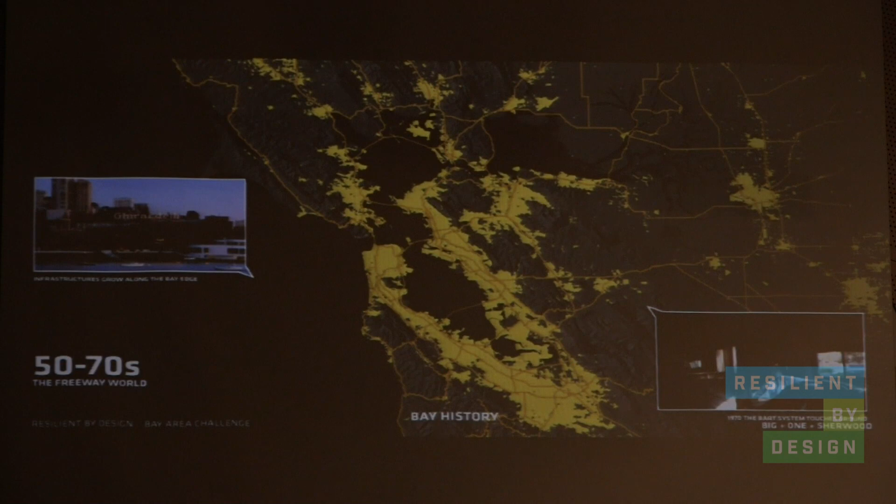For us, the Bay is a really incredible place because it's emblematic of this dynamic that exists in many cities around the world. It's a place with incredible natural richness and resources, and that's why people have flocked here for centuries to take advantage of those resources. At the same time, that occupation is the very thing that threatens it. If you look from early settlement, Native American, to a series of towns during the gold rush, the Bay has just kept expanding sequentially to the point that now it really works as one region, but at a scale that is disproportionate to any means to control it.

And it's that kind of sprawl and development pattern that has led to the urban challenges that we know today, from transit and congestion to housing, lack of affordable housing and displacement that results, strained infrastructure bringing flows from far away, ecological decline along the bay's edge. And those development patterns and the kind of emissions and lifestyle associated with it have also been in part responsible for the climate stresses that the bay feels today, from sea level rise and storm flooding to drought and wildfires to earthquakes and liquefaction.

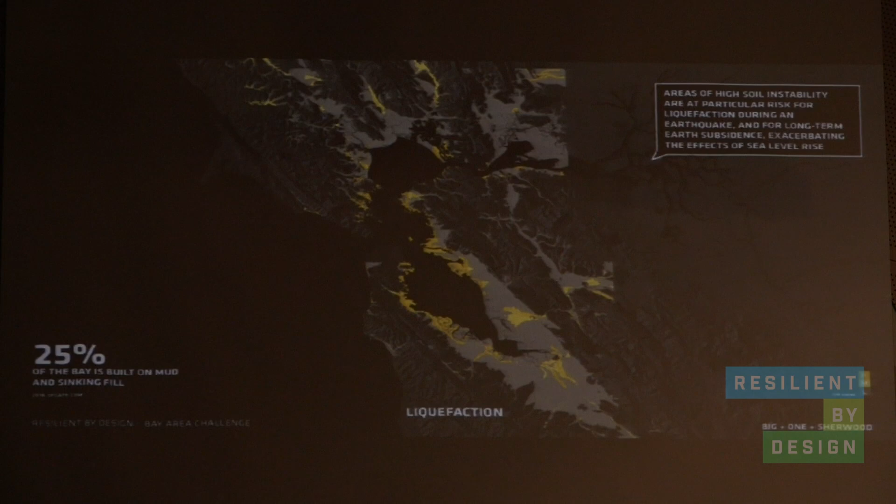And so our approach to the bay has been that climate stresses and urban stresses are really one. And in order to build a more resilient bay, we need to work on both equally. Simply put, to become more resilient, sustainable, and equitable, and to deal with some of these challenges, the bay needs to link its natural systems to its urban systems in a better way. It needs better transit, it needs more housing in the right places, and it needs to modernize and decentralize its infrastructure to build resiliency.

We're also cognizant of the way that things are done in the Bay Area, which is also a symptom of many cities, certainly in this country, that the silos of city making really don't talk to one another. I think in the Bay in particular, you see ecological discussions completely separated from urban discussions. Transit works on its own logic, infrastructure and people all kind of work separately.

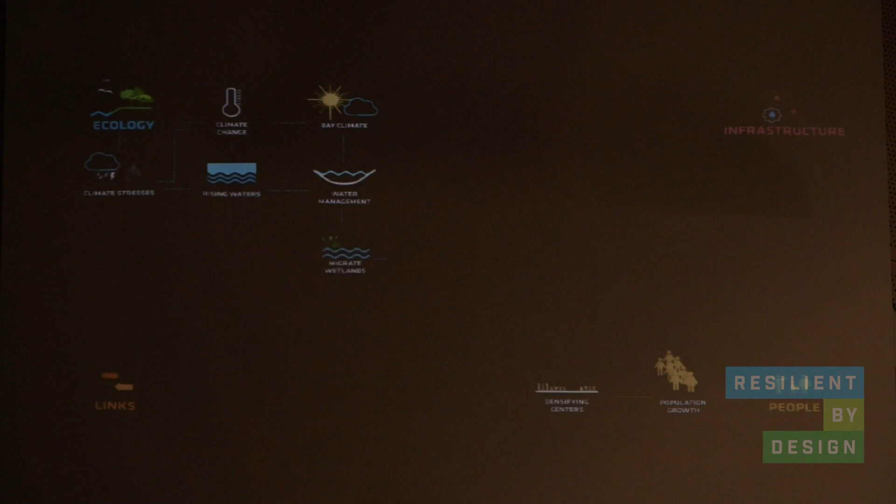So simply put, our proposal is that we need to think of all of these elements together as one, what we call a social ecosystem, where ecological planning provides a framework for growth, where growth responds to transit rather than the other way around, where all the incredible ingenuity and resources of the people of the Bay work to develop these systems, and where infrastructure is decentralized and localized into community.

So if this is the Bay today, we've developed a series of proposals at a regional scale. These proposals all find a place geographically as a framework, beginning with the creek system that once really defined the Bay, that's been culverted and tunneled over the years and sprawled around. Can these creeks become a new kind of framework for the Bay, allowing for an increment for sea level rise adaptation and a new unit of community?

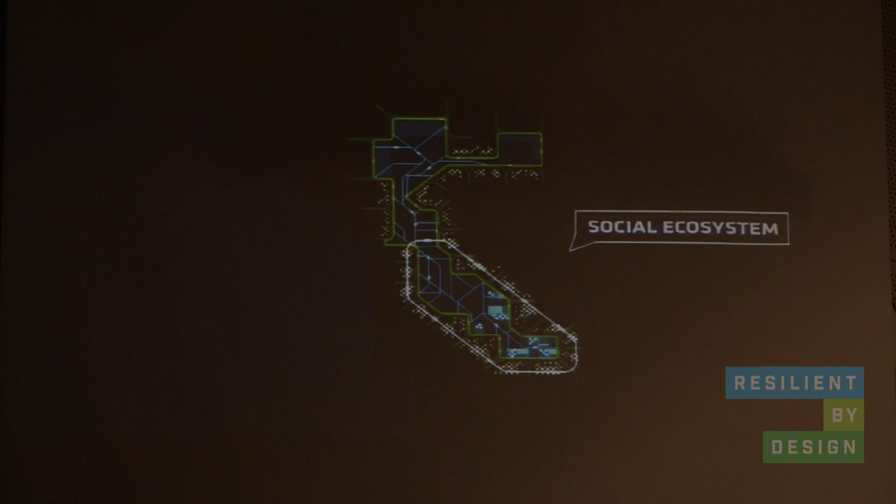Can we peel back decades of paved over surfaces in the uplands, allowing for better recharge of the groundwater and fighting drought? Can we use the assets that the Bay has to build better transit rather than building new kind of shiny infrastructure? Can we use our roads, use the Bay itself, use our trails, and better connect things in a more flexible way? And can we rediscover the edge of the Bay, both as a place for ecology, but also as a place for people?

So we've looked at 3 design opportunities, and to give you a little bit of a sense of our process, we'll start with the first one up at the Golden Gate.

Given that the initial frame for this competition was sea level rise, and it is one of the more acute risks in the area, we were curious about the dynamic between local adaptation, which we think can and should take place in order to adapt to sea level rise. It might happen in different ways in different parts of the Bay. But we also know that there's a lot of uncertainty about the extent of sea level rise and the kind of numbers we're going to be dealing with in the future.

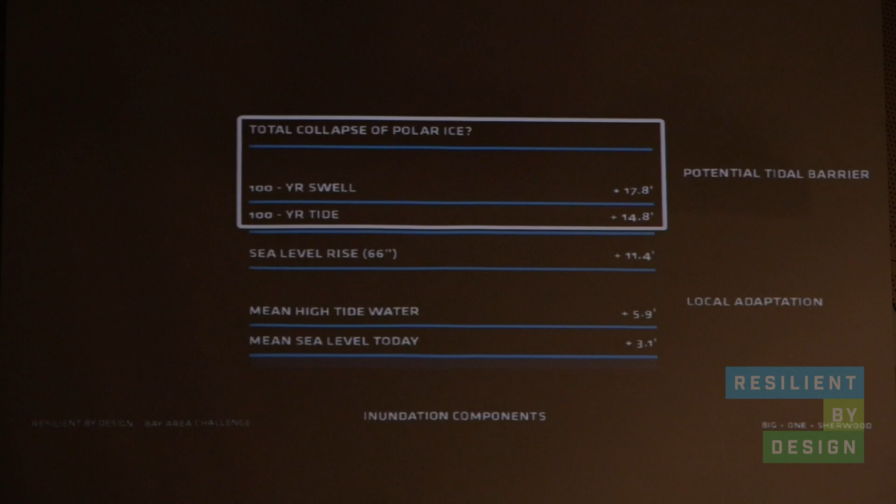So we were interested in looking at a regional strategy that would take a component of this risk, tidal, annual king tides and storm surge, and deal with it on a regional level. We looked at the difference between 500 miles of investment in levees to keep up with potentially extreme height, and also a series of locations for tidal barriers, including the Dumbarton Bridge, the Bay Bridge. And then we looked at the Golden Gate Strait itself, the location of the BCDC competition several years back.

And we developed an alternative proposal for this area, which would build on the 7-mile crescent of shoals, which is left by a sediment deposit coming out of the bay. Basically at about 30% of the same material that it would take to build a barrier in the deep prism there, about 7 million cubic yards of fill, you could create a barrier that would take care of those more extreme levels of sea rise and tidal inundation while allowing for maritime traffic and so on. So this is something that we think is interesting.

It's something that we think should be looked at, but we also focused our attention on a series of other sites at a more local scale, starting with Islais Creek.

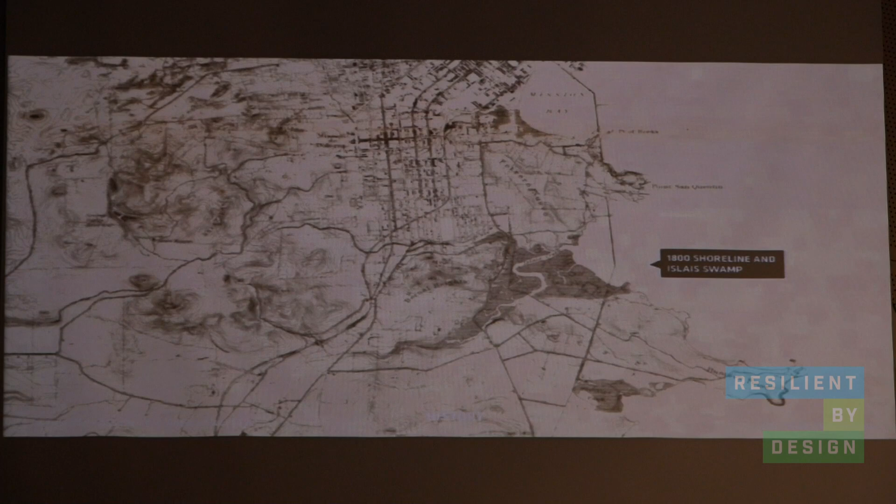Islais Creek is, I think, a really important site that's been at the center of a lot of the industrial activity in San Francisco, and is also the site of one of the original ecological and wetland systems that no longer exist in any serious scale in San Francisco. In particular, this part of San Francisco was culverted and put into creeks at the formation of the city and the development of the southeast part of San Francisco.

The need for the expansion of freeways and circulation infrastructure has added additional layers on top of Islais Creek for circulation and transportation. Beyond that, this has become a hub for a lot of the maritime activity and port activity on the waterfront, which has changed in nature and scale over time, but still has a deep water harbor and significant productive use, including providing a number of jobs, which we've heard from people living in the neighborhood are extremely important to preserve in that location.

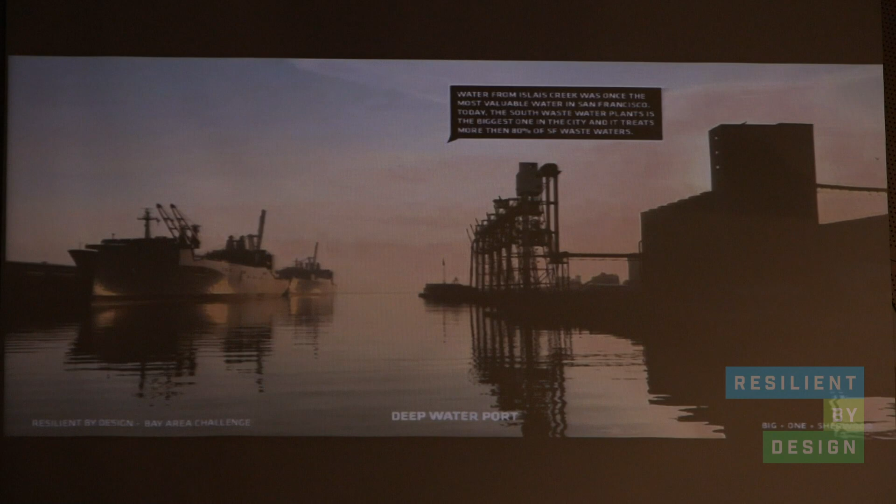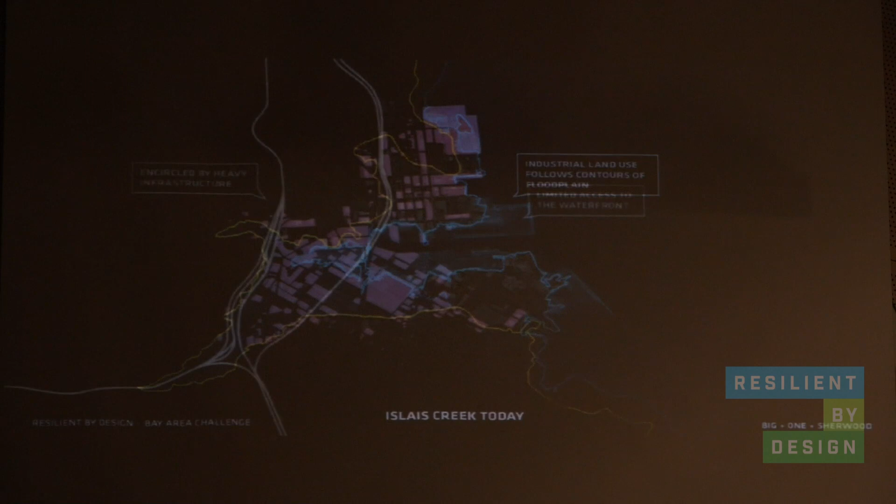Here we've overlaid the major two freeways that run through this neighborhood that effectively disconnect or pass over the two residential communities of the Dog Patch and the Bayview, Dog Patch to the north and Bayview to the south.

So we see this part of the city as an incredible opportunity. It's one that the city has put forward as a design opportunity for us to consider. And so we've taken a really bold approach, we believe, to say what could be possible here. It started with listening to people in the neighborhood, to touring all the different sites with many of you. And our proposal starts with an idea that really says, could this be a place where San Francisco creates a 300-acre restored wetland and riparian system as part of a restored marsh?

Could we take what is now a small inlet that once was one of our most important creekways and really restore it substantially to the south and to the west? And take advantage of a rare, if not the only, last opportunity in San Francisco to really think about managing stormwater and floodwater in a different way.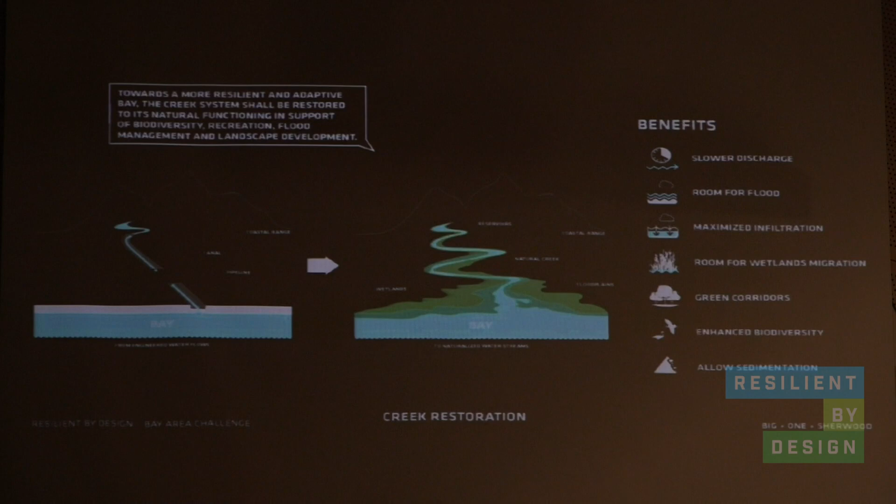And to take the existing channel and to transform the southern side, to take some of that 300 acres of industrial land to create vertical industrial development opportunities for a net positive increase in the density and development of this neighborhood to provide more jobs than there are today, but in a more compact location that allows for the ecology of this to come closer to its original form.

So you can start to see this evolution that might actually be facilitated by moving some of the heavy industrial uses potentially to a new series of barges or a reconfiguration of Brisbane Bay to the south, and potentially even relocating parts, if not the entirety, of the wastewater treatment plant that is currently adjacent to the Bayview neighborhood.

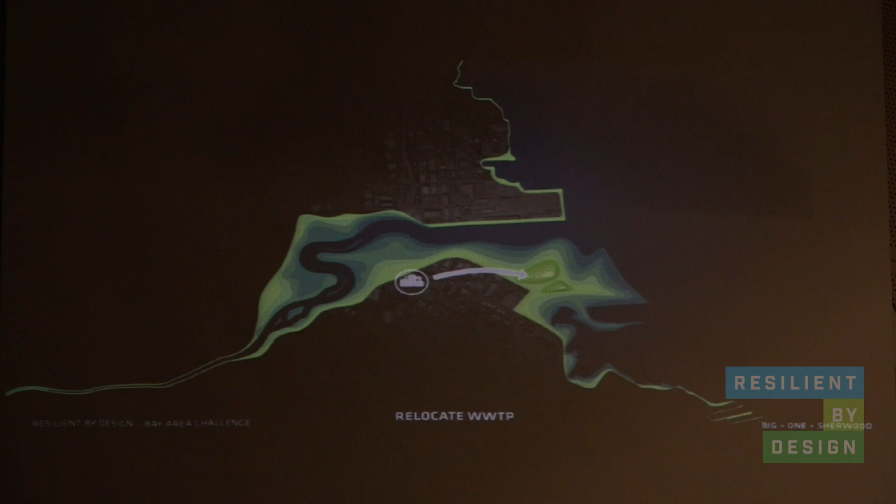So we don't have all of the answers in the sequencing to this, but we have a good idea of the process today and the potential evolution to more ecologically integrated means of managing and processing wastewater at this massive facility that today takes 80% of the city's wastewater. Could that start to be thought about differently? We think so as part of our proposal. And I think Jeremy is going to continue with a couple more ideas.

Sure. So this gives you a sense of the resource recovery park and plant on the edge that Bree just talked about.

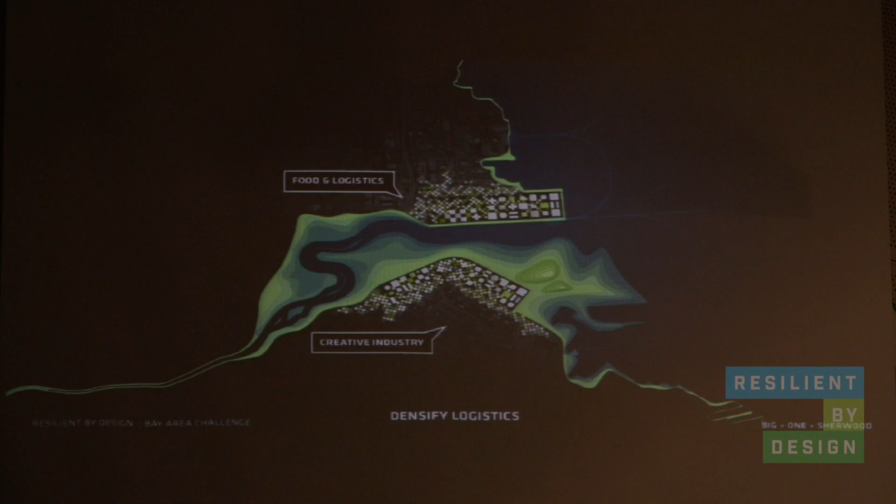So what all of these infrastructural improvements do is provide a frame for resilient growth. As Bree said, what we heard loud and clear from the community when we visited was that the kind of industrial jobs in the neighborhood should not just be protected, but increased. So what we propose is a densification of industry and logistics connected to the Deepwater Port, maintaining this area as a critical node for San Francisco to its south, and taking this low-rise industrial area that sits in the floodplain and really densifying it.

We also see opportunities to connect. I-280 has been contemplated for a long time, this spur that juts off of the 101 and runs north, for decommission and potential demolition. For us, the cost of demolishing it might actually be better spent to enhance it, not as a machine for cars, but rather as a machine for light mobility, for pedestrian connectivity, with spurs reaching into the neighborhood.

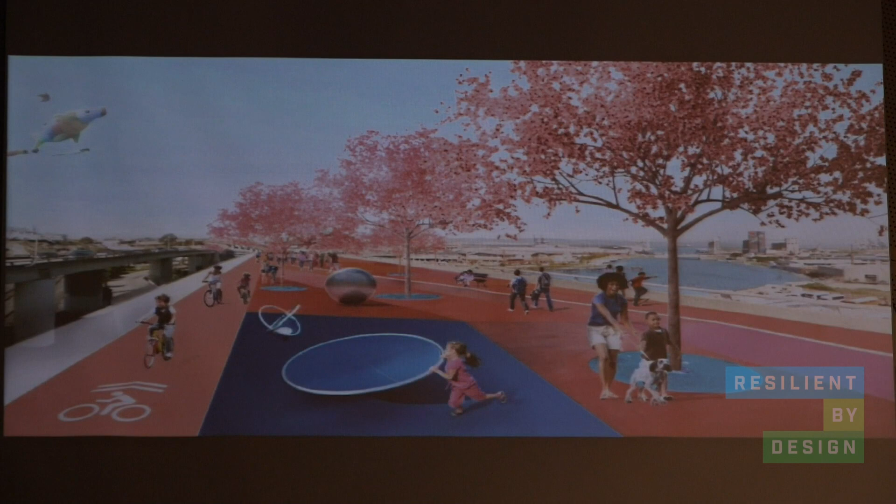This is Islais Creek in the background, going from a gray, tunnelized, culverted creek disconnected along the transect, to an activated, natural, and also industrial heart for Bayview. We also see this really as no small plan. If San Francisco has Golden Gate Park, which serves a huge area around it, there's really a lack of this kind of open space in this part of the city. So we really see Islais Park as the green, resilient, and industrial heart for this part of the city.

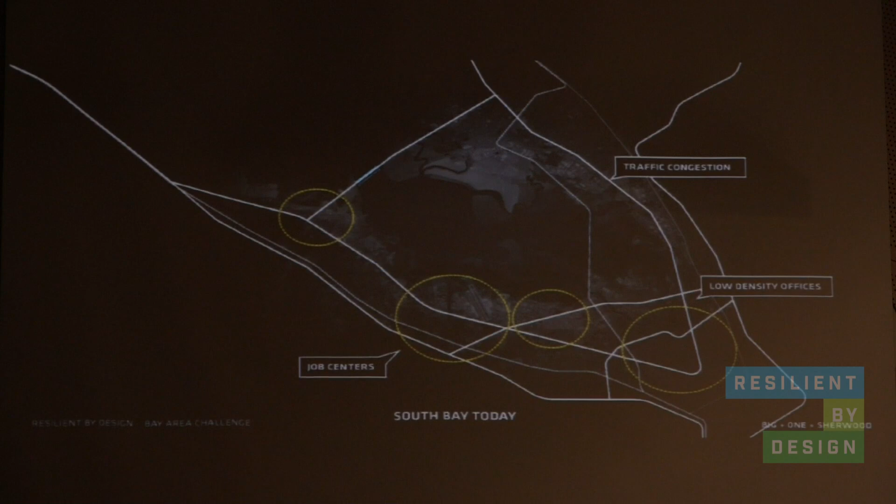So I'll talk a bit about the South Bay design opportunity that we have. We call it South Bay living because we think South Bay is known for many things, but not really for living. If you can even afford it, it's not good for living. It's for traffic jams, for Silicon Valley, for inequity and all these things. One of the things about the South Bay is that you see many urban stresses coming together there, and those will be compounded by climate-related stresses that come from sea level rise.

We feel it's very difficult to address these stresses so far, in part because of the atomized way in which the Bay has organized itself. So what we want to propose is a systems perspective on the South Bay, which maybe starts with thinking about mobility and transit, where you see that it's really car-oriented.

Caltrain comes there, but hardly anyone uses it, which is logical because there's no way to get from the stations to the different workplaces that are there. And that's why even big ideas, which we all enthusiastically work on, specifically Jeremy and his firm like the Hyperloop, are not opportune here.

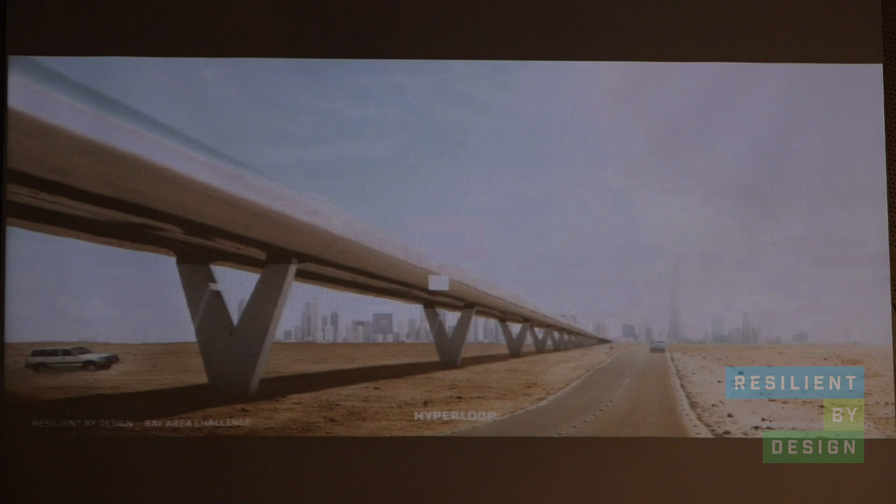We think that, especially given the innovative culture there, you might really look at developments in mobility technology, and at the existing assets that are there—the trails, the highways, maybe even the ferries. So if you want to approach mobility, you might start by asking: can we activate these trails for e-bike mobility? Can we think about how these e-bikes could connect both to the uplands, to the different workplaces, but also maybe to a ferry-related system?

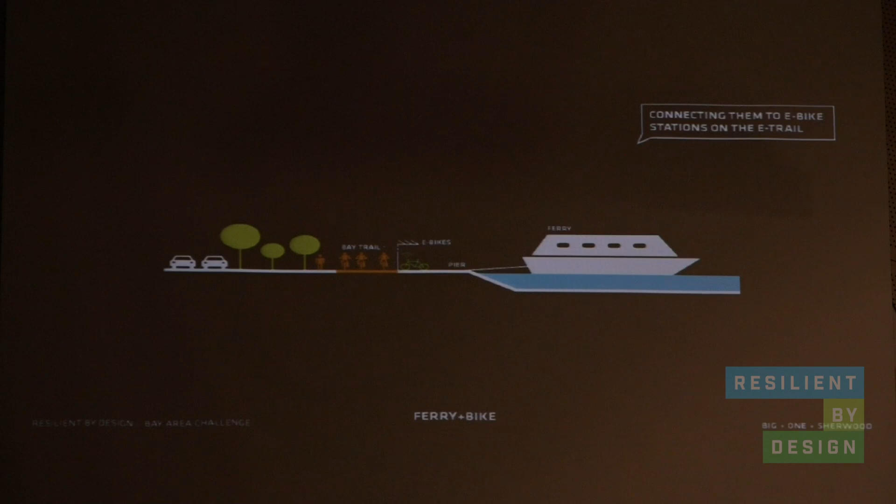This ferry boat, of course, is too big and will have difficulty getting into the South Bay, but you can imagine that in the future, especially with sea level rise, there are whole new sets of ferry technologies that can actually work very well there.

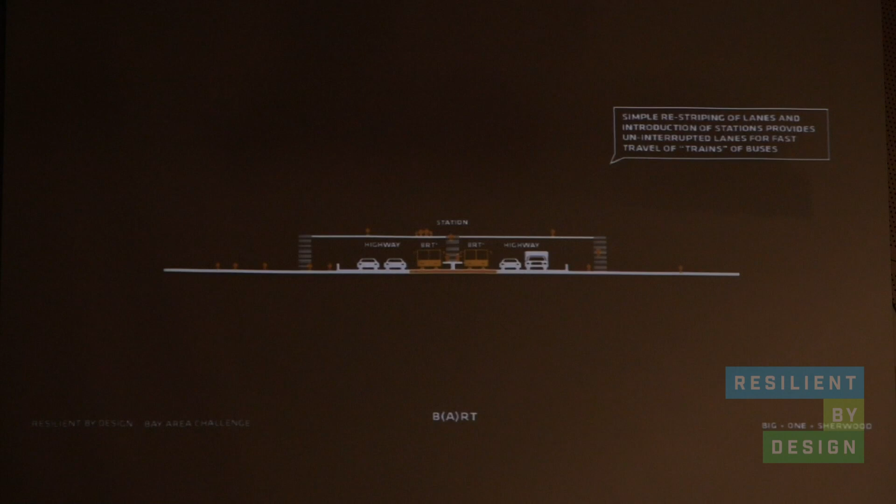A second component of that mobility strategy would be to rethink the highways, which are now big, clogged arteries through the South Bay. That image would have shown a BRT system—maybe we don't want to show it because we built on it—but we also think it can be rethought into the future. Bus rapid transit could maybe be implemented on the highways, and with the advent of new car technology, become vehicle rapid transit, with stations on the highway connected to developments on either side.

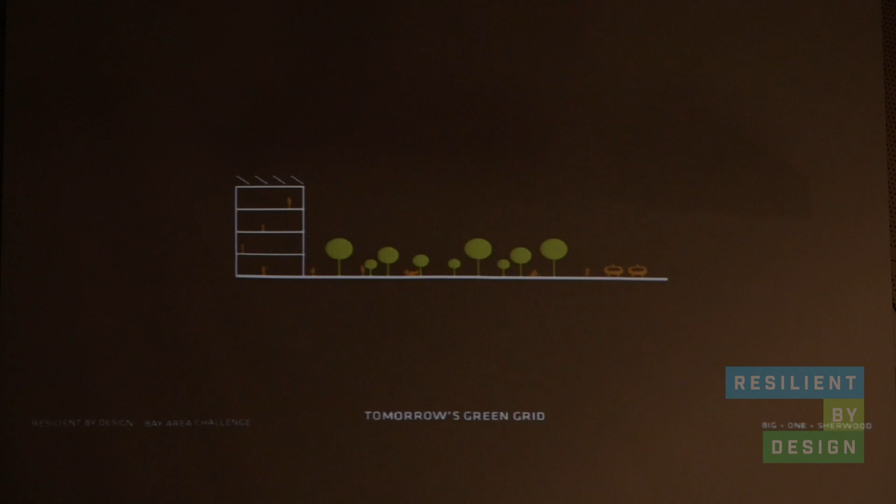A second component of that thinking is once you start to think about how we can use these developments in vehicle technology, you start to look differently at these parking places that are now large swaths of impervious surfaces that might not be needed in the future because mobility changes. So you can think maybe we can densify them at parts, build other programs there, and at the same time green them and create spaces for water, so that we turn the gray grid into what you could call a green grid.

We made the calculations and figured out that more than 500,000 dwellings plus a lot of jobs could be done at a relatively modest height. And that brings, if you link those two systems together, you can start to think about a densification strategy in the South Bay.

To which a third element, the ponds, could be fantastic assets. These ponds, people have talked about it, we think will not function in the long term as a nature system, as a natural system. They've never really been that, so we think they should be explored as a constructed environment with a lot of different functions they could have.

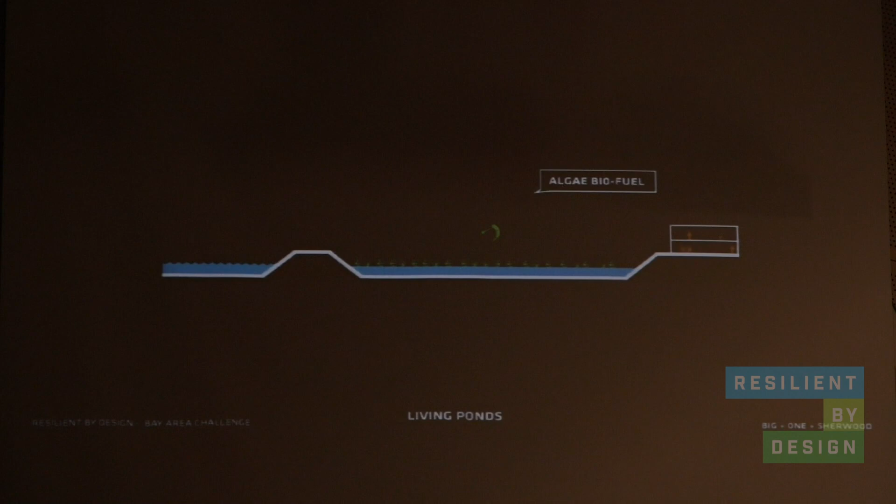Ponds could be there for algae production. They could be used as batteries. They can be used to retain stormwater. They can do solar. And in the end, once you start thinking about that, you can start thinking about floating villages there that can also become interesting elements for innovation, where you link these systems together on a smaller scale.

We feel that as we talk to people in those areas and understand their stresses, but also their forward trajectories, there's really a project there, a project that not only works to create a lot of housing, a different view on mobility, but which can also give a different sort of signature on the bay.

I'm going to let these films roll and give it to Jeremy.

So imagining, as Matthijs said, not only infrastructural functions, but also living at the edge. And I know we're out of time, so I'll just close by saying that for us, climate change, there's kind of everything just coming together as one system.